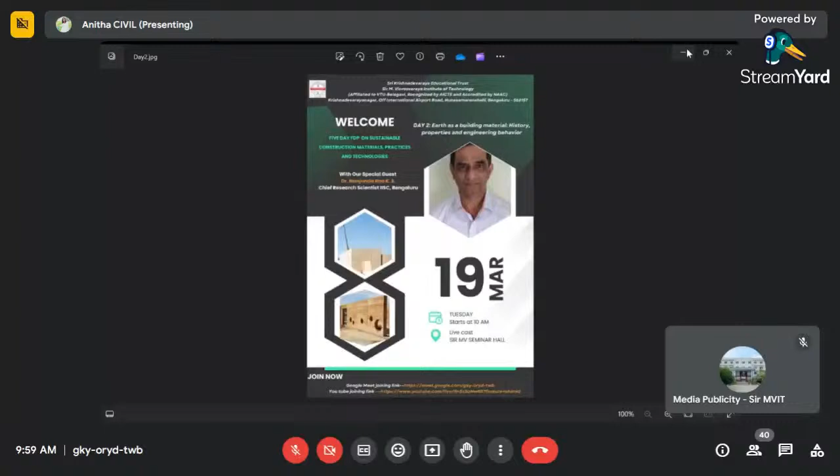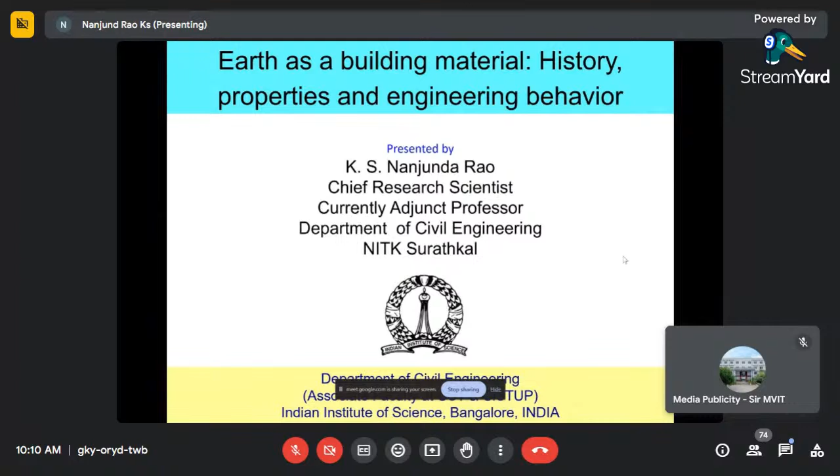That is when the discussion happened that we need to establish a research institute in India during the British times. At the same time, Tata was also very much interested in starting a steel plant in this country because we were importing all the materials. So these discussions between these two great giants, visionaries, finally gave birth to this Indian Institute of Science.

It took its birth possibly in 1903-4. And at the same time, I would like to recall and thank another great person when they were really scouting for land to establish this institute after the idea was mooted by J.N. Tata. With great difficulties, the British agreed.

They were looking for land, where to set up, in which place. Initially, it was Roorkee, but subsequently, due to great difficulties, they finally chose Bangalore for setting this up.

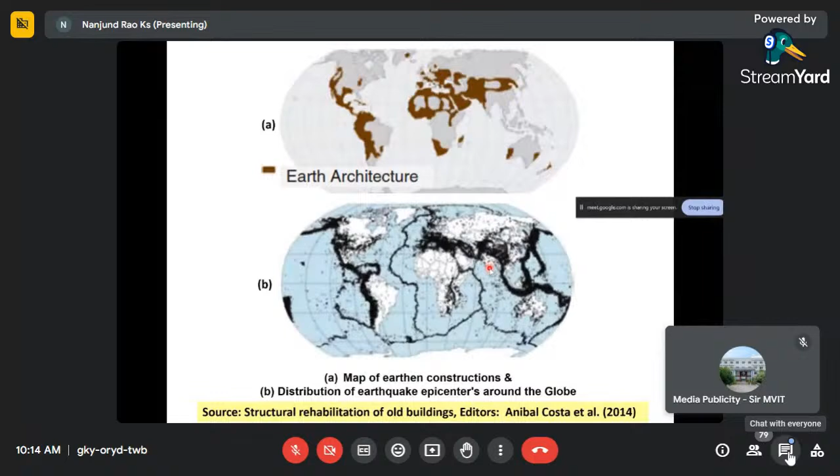Earth as a building material is the first material - you can say it has a huge history. It was one of the materials which was locally available, and therefore it was employed in its raw state. Subsequently, as development took place, as scientific progress took place, it is no longer used only in the raw state, but still people use it in the raw state, that is, earth without any stabilizing.

Now, sustainability is what is the buzzword today. People simply use the word. Now, what is it? From among the challenges of the future, starting with the hot topic of recent economic blow-up, to the global socio-political scene, as well as the cultural needs for the growth of mankind, there is one which can be considered extremely fundamental for all future development, and that is sustainability.

Now, let's look at what is sustainability, a loosely used word very often by everybody. What is sustainability? Can it still be a buzzword? But what does it mean?

Now, Brundtland, in his report in 1987 to the World Commission on Environment and Development, broadly defines it as follows: meeting the needs of the present generation without compromising the ability of future generations to meet their own needs. This is what Brundtland defined sustainability as.

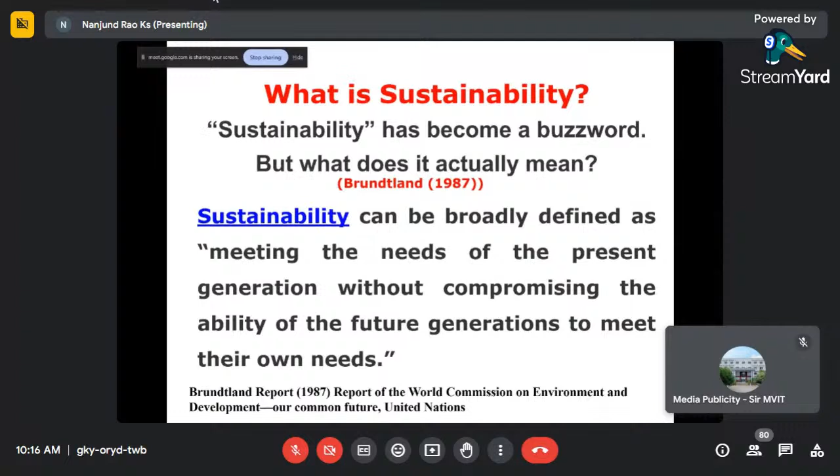Now, I would like to share with you that the concept of sustainability, even though Brundtland defined it in 1987, nearly 40 to 45 years before, in India, people already started thinking about it. Kumarappa, in 1945 itself, in his paper on economy of permanence at Sarva Seva Sangh Prakashan, Varanasi, India, actually started defining what is sustainable development, what is sustainable society.

According to Kumarappa in 1945, a society which manages its economic growth without causing irreparable damage to the environment, and satisfies the needs without jeopardizing the prospects of future generations, is a sustainable society. So the awareness of sustainability was much before even people started thinking at the international level, and that is the importance of Indian thinking, which we today do not want to give too much weightage to, but India was always leading from the front.

Now, sustainability itself has multiple dimensions. You can look at sustainability as a thing supported on three pillars, which are the powerful tool for defining and analyzing issues of sustainability. The three pillars are social, environmental, and economic. Let's look at it in greater detail now.

When it comes to describing sustainability, we need to be concerned about three main areas of influence. They are the three interconnected spheres, called spheres of sustainability, that describe the relationship between them: one representing environment, the other economic, and the third social. All these three things have to be addressed.

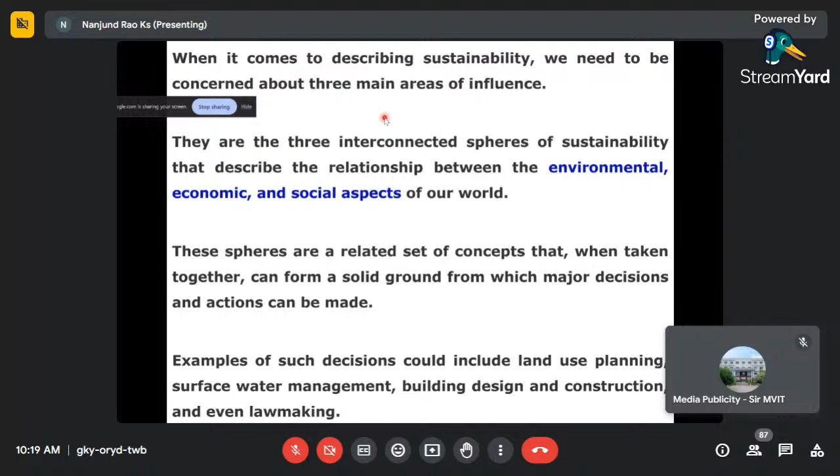Examples of such decisions include land use planning, surface water management, building design and construction, and even lawmaking.

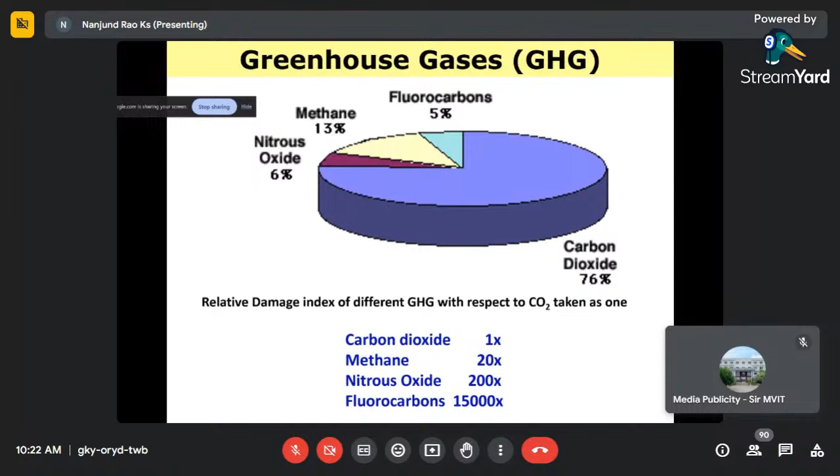Now if you look at the damage index of these four GHGs in comparison to CO2 taken as one, even though CO2 is highest in quantity, methane causes about 20 times more damage compared to carbon dioxide, nitrous oxide is 200 times, and fluorocarbons, used in refrigeration and significantly reduced today after understanding their impact, is about 15,000 times. So that is the kind of impact these four gases have on the planet.

So the topic of today's faculty development program is sustainable construction materials, concentrating on construction materials, practices and technologies. Keeping this in mind, I am going to talk about one of the earthen materials called rammed earth, for construction in civil engineering.

Now, concrete is largely used in civil engineering construction, in large amounts. In the last 110 years we have been using Portland cement concrete. Earlier, the binder was lime, so it could be surki or lime concrete. But Portland cement concrete, we say, is not sustainable. What are the reasons for it to be not sustainable in relation to the greenhouse gases we just discussed? And not only that, there are other reasons too.

The first reason is that the concrete industry consumes a huge amount of virgin materials. Even in the production of Portland cement itself, we use large amounts of virgin natural materials. We also use fine aggregate and coarse aggregate in concrete, and even though they are inert, we use large amounts of natural materials for them. We quarry, for example, fine aggregate from river sand. Now that is banned, so a lot of quarrying is happening to get coarse aggregate. And in the absence of fine aggregate from river sand, we are now crushing rock to make M sand, manufactured sand, which again utilizes virgin natural resources.

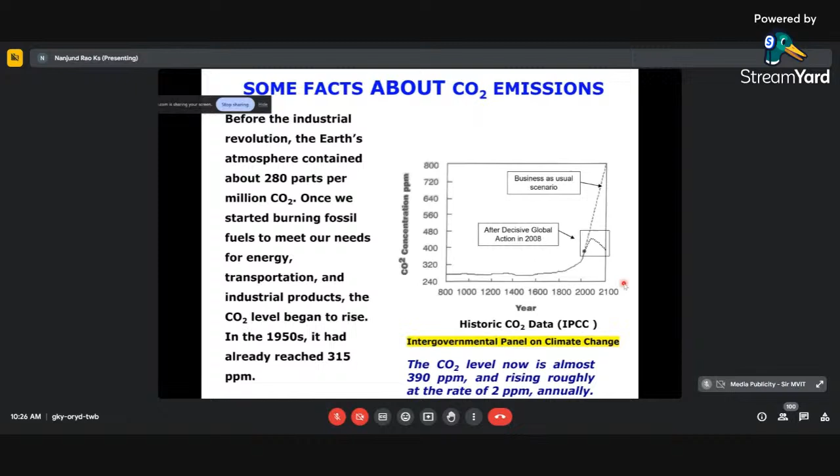Let us continue to see what happens. Now, some more facts about carbon dioxide emissions. There is no magic bullet to stop this global warming quickly.

A number of reports have indicated that approximately 450 ppm of CO2 is the threshold level. That means if you cross this threshold, it would have already caused irreversible damage to the planet. The window of opportunity for mankind is very small, and we have to immediately take action to slow down the rate of further increase in CO2 levels, and eventually bring it or keep it below 450 ppm so that there is no irreversible damage.

This is again taken from some of the studies by McKibben in National Geographic, October 2008. The chart on your right clearly shows that if you take corrective actions, you may be able to bring it down in the near future. But we need to take a lot of actions, not just one.

Now let us go to some more facts about CO2. What is this CO2? In Earth's atmosphere, carbon dioxide is a trace gas that plays an integral part in the greenhouse effect, carbon cycle, photosynthesis, and oceanic carbon cycle. It is one of the several greenhouse gases in the atmosphere of Earth.

The current global average concentration of carbon dioxide in the atmosphere is 421 ppm as of May 2022. This has further gone up - it is 424 ppm as of March 2024. This is an increase of 50% since the start of the Industrial Revolution, up from 280 ppm during the 10,000 years prior to the mid-18th century. The increase is due to human activity.

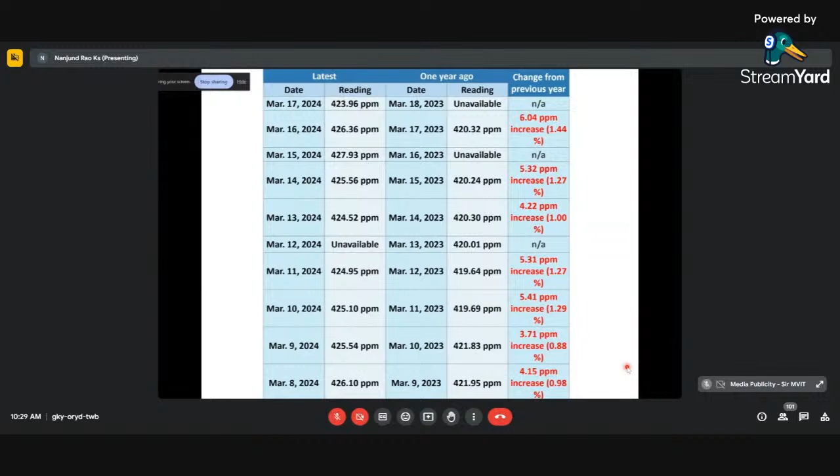These are some things about CO2. Now, as I mentioned, we are roughly about 424 ppm. You can see from March 8th to March 17th, the readings and what is the ppm. On March 16th, 17th, we are already at 424 ppm. So 450 is the threshold level - we are just away from that.

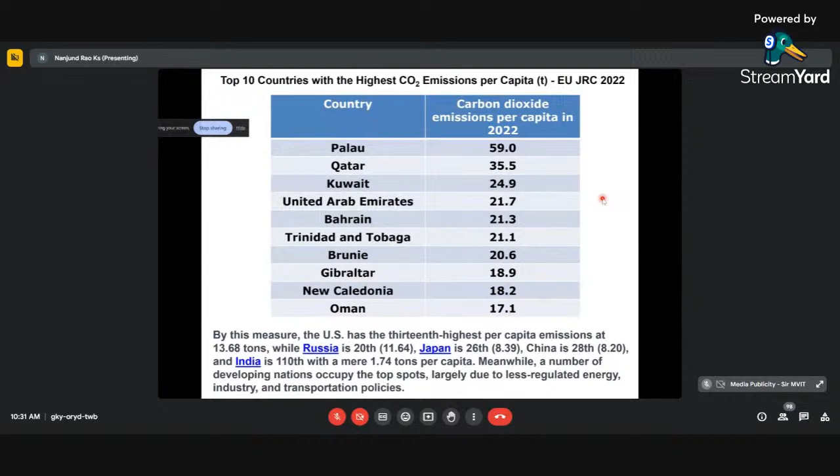Meanwhile, a number of other developing countries occupy higher or top slots, largely because of regulation issues in terms of their energy, transportation policies, etc.

So let's come back to our civil engineering material, that is concrete itself. Portland cement production is highly energy intensive. The industry is consuming energy at an annual rate of 7 billion gigajoules. The cement industry is also implicated in global warming - Portland cement clinker production is releasing nearly 1.5 billion tons of carbon dioxide, which is approximately 7% of global carbon emissions.

Now, modern Portland cement concrete, because it cracks easily, has poor durability. Thus, the material efficiency, which is called resource productivity, of the concrete industry is very low.

Let us look at concrete and Portland cement. Global usage of concrete, as I already mentioned, is second only to water. The demand for concrete is increasing to meet infrastructure developments, especially in developing countries like China and India. Current Portland cement production is insufficient to meet this increasing demand. Do we increase Portland cement production, or can we use alternative binders to meet the increasing demand for concrete? This is the big question in front of all of us.

What are the issues with Portland cement? Portland cement production releases high amounts of CO2 to the atmosphere. Production of 1 ton of cement clinker earlier released almost 1 ton of CO2, but today with changes in production technology, about 750 kgs of CO2 is released into the atmosphere for every ton of cement clinker produced.

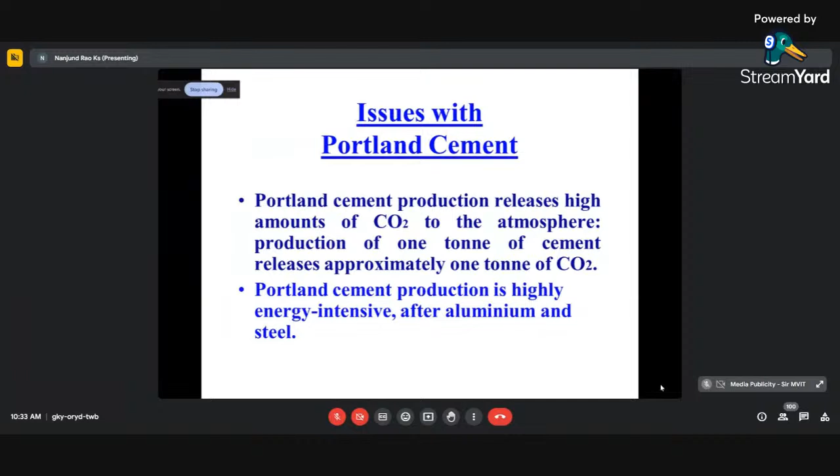Portland cement production is highly energy intensive, after aluminum and steel, which are also construction materials. There are different strategies suggested in the literature to reduce the carbon dioxide.

So what are the things that have been looked at? One of them is carbon capture and storage. We cannot stop carbon dioxide emissions, but we want to limit it in the atmosphere. Cement production cannot stop because we have not yet successfully produced a new binder, so we have to still survive - Portland cement production will continue. Some carbon dioxide eventually, whatever be the efficiency of our production techniques, will still come out. So one way is to have strategies to reduce it by capturing that CO2, not releasing it to the atmosphere, and storing it - this is one of the things that have been tried.

The second thing is, can we reduce the amount of Portland cement in our concrete? How is it possible? By using supplementary cementing materials like fly ash, GGBS, rice husk ash, and so many other things which are available, so that the amount of clinker consumed in concrete can be brought down.

Then the third one is use of nanotechnology - I'll come to it a little later. And the fourth is to look at alternative binders, which are the alkali activated binders.

Now, these approaches which I discussed are not really feasible. What are the reasons? For example, carbon capture and storage - it is a very cost intensive process and it needs a lot of storage. It is economically very, very unattractive for cement industries, and if it is so unattractive, nobody would like to use this process.

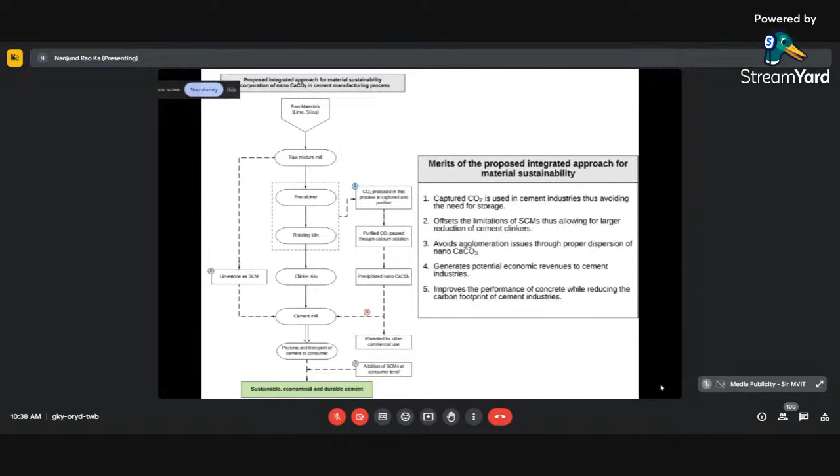What are the merits of this integrated approach? Captured CO2 is used within the cement industry, thus avoiding the need for storage. It offsets the limitations of supplementary cementitious materials, allowing for larger reduction of cement clinkers. It avoids the issues of agglomeration in nanotechnology through the dispersion process. It generates potential economic revenue to the cement industry, so the cement industry will accept this. It improves the performance of concrete, that is durability, while reducing the carbon footprint of cement industries. This is the very latest paper which talks about an integrated approach to address CO2 emissions in a very efficient manner.

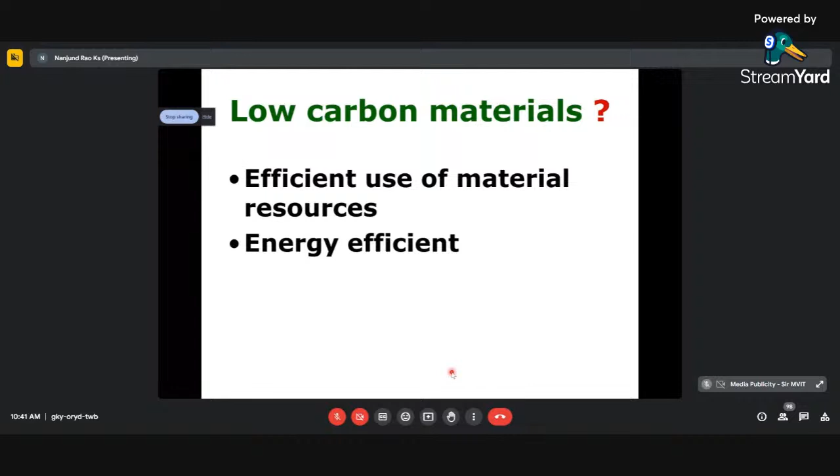We will now come back to narrower things, which is low carbon building materials. What are these low carbon building materials? Why are they low carbon? Efficient use of the available material resource. It is energy efficient, it is recyclable. It reduces GHG emissions and CO2 concentrations in the atmosphere. If it satisfies many of these things, then only it is eligible, qualified to be called a low carbon material.

Today's discussion will concentrate on one aspect where earth is used, called rammed earth construction, both in stabilized and unstabilized form. What is this rammed earth? Rammed earth is a form of unbaked earth construction. When I say unbaked, there is no need of firing, which we do in fired clay bricks. Therefore, it helps avoid deforestation, which is one of the issues I mentioned. So you are not going to burn at all. The processed soil is compacted in layers to form a component of a building structure, which is termed as rammed earth.

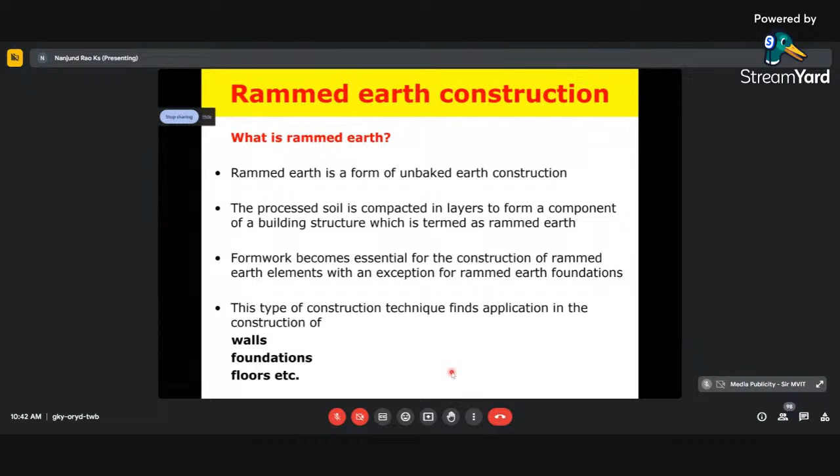Formwork becomes essential in rammed earth construction, with the exception of rammed earth for foundations. For foundations, you dig a trench, put in your processed soil, fill it, and keep ramming—no formwork is required there. For all other building elements, a rigid formwork is mandatory. This technique finds application in the construction of walls, foundations, floors, and so on.

Now let us look at the history of rammed earth itself. Is it something new, innovative, that we discovered today? No—rammed earth has been used for construction of walls for several centuries. You can see rammed earth in the Great Wall of China in the 3rd century. The Phoenician settlements in southern Europe used it in the 7th century. Rammed earth buildings are found in the Himalayan region of India and Tibet around the 8th century. Old buildings in the Middle East and Africa constructed thousands of years ago also represent some of the historical rammed earth constructions. There are a large number of modern stabilized or unstabilized rammed earth buildings built worldwide in the last three decades. I can show you pictures a little later.

Now, what are the advantages of rammed earth? It can provide aesthetically pleasing surface textures—a few slides later you will see how pleasing the aesthetics is, with colors obtained through careful selection and preparation of materials, giving very colorful results and good surface textures. It reduces carbon dioxide emissions, is fire resistant, and offers flexibility in wall thickness. Strength requirements can be tailored by suitable mix design. It allows flexibility in plan forms—walls can be built straight or curved. It is dense and bulky, hence has considerable thermal mass and offers scope for passive environmental performance.

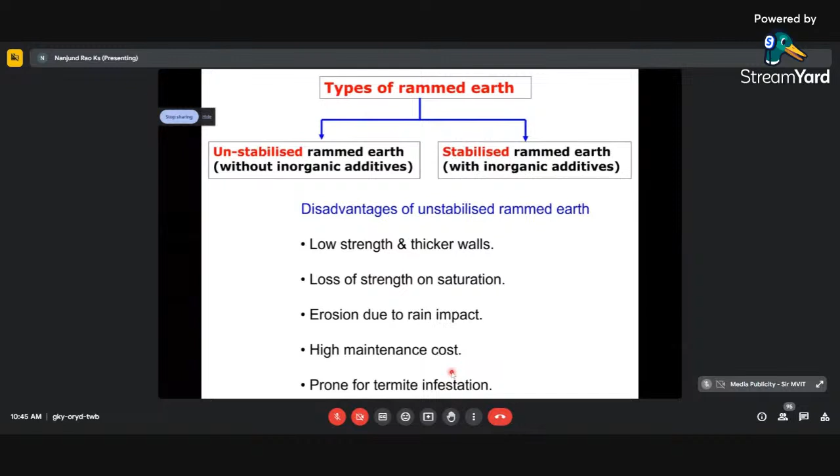Now let us make a critical comparison of unstabilized and stabilized rammed earth. On unstabilized rammed earth: it uses natural materials and therefore has negligible environmental cost at the end of life—meaning when you don't want it anymore, recyclability is there. It has good moisture buffering properties, and thermal performance is very good. It has lower cost with scope for self-help construction, and very low embodied carbon. However, it has lower strength and hence thicker walls, loss of strength and stiffness with moisture absorption, is prone to erosion from rain impact, and is prone to termite and insect infestation and damage, especially in tropics and subtropics.

Now, in comparison, let us look at stabilized rammed earth. It has higher strength than unstabilized rammed earth, even in saturated condition. It's easy to achieve desired strength, with scope for taller buildings, and it's possible to build thinner walls. The use of inorganic stabilizers such as cement or lime is mandatory, which results in higher embodied carbon compared to unstabilized rammed earth. However, it has better durability and good erosion resistance compared to unstabilized rammed earth.

It is also free from termite and insect damage. So each one has its own advantages and disadvantages, and we have to very carefully select based upon the requirement and our needs.

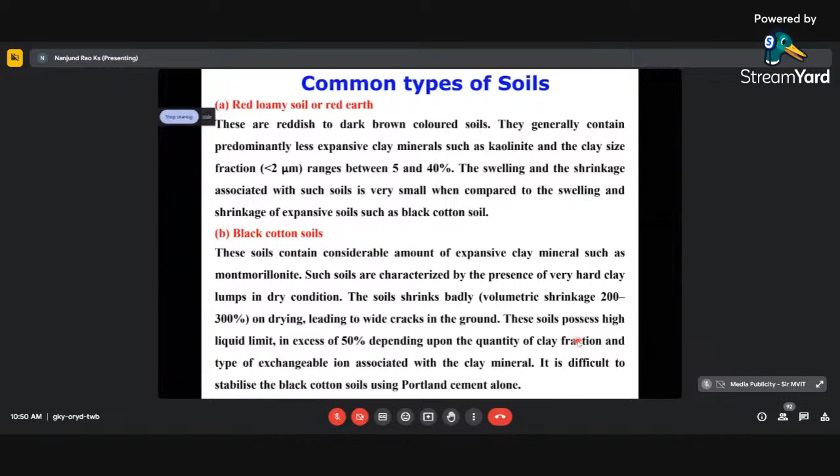The second is, as you go to the north of Karnataka, you will see black cotton soil. It is good for agriculture, particularly cotton, groundnut, and other agricultural products. But these soils contain a considerable amount of expansive clay mineral, montmorillonite. Such soils are characterized by the presence of very hard clay lumps in dry condition. The soil shrinks badly, with volumetric shrinkage of something like 200 to 300% on drying, leading to wide cracks in the ground. These soils possess high liquid limit in excess of 50%, depending upon the quantity of clay fraction and the type of exchangeable ion associated with the clay mineral. It is difficult to stabilize black cotton soils even using Portland cement or lime alone.

The third is the ash modified soils. This is a special kind of soil often found in black cotton soil zones. This soil is called Halu Mannu in Kannada, also called Gadki Mitti in Hindi. Such soil deposits are mined and used for construction of walls and roofs. These soils contain 2 to 3% organic matter in addition to 5 to 6% dissolved salts. They are known to be artificially made soils by mixing organic matter and wood ash and allowing very long durations for natural cyclic wetting and drying.

These soils exhibit very low swelling and shrinkage characteristics and are silty in nature. The Halu Mannu is well suited for stabilized compressed earth block production, using either lime or cement as the stabilizer. The ash modified soils show excellent reactivity with stabilizers like lime and cement compared to natural soils like black cotton soil or red loamy soil.

The last one is the lateritic soil, found in Kerala and coastal parts of Karnataka. The term laterite was first introduced by Buchanan in 1809. The laterite was described as ferruginous, vesicular, unstratified, and porous material with yellow ochres. Laterite can be cut into blocks. In fact, in these regions, the soft material is cut into different shapes and allowed to undergo carbonation exposed to atmosphere. It takes away the carbon dioxide and is made into masonry units. That is why in Latin, laterite - later means brick.

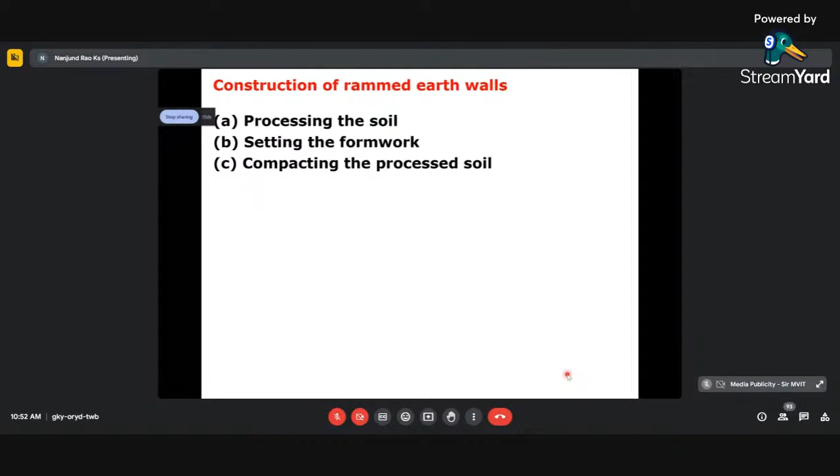Now let us come to the next step of construction of rammed earth. What are the different steps? One is processing of the soil, second is setting up of the formwork, third is compacting the processed soil in the formwork, and curing and later drying. These are the four major steps involved in construction of rammed earth walls.

Now what is processing of soil? The steps involved are breaking the lumps and screening, that is sieving them up to 5 mm size, mixing this soil with sand and gravel in a dry state, and mixing this mixture with cement or lime if it is a stabilized rammed earth, in the dry condition, and later adding water to this.

Now, the quantity of water to be added depends upon the soil composition. Generally, about 10% water is sufficient to bring it to a consistency suitable for compaction. Too much water makes the soil sticky and poses problems during compaction.

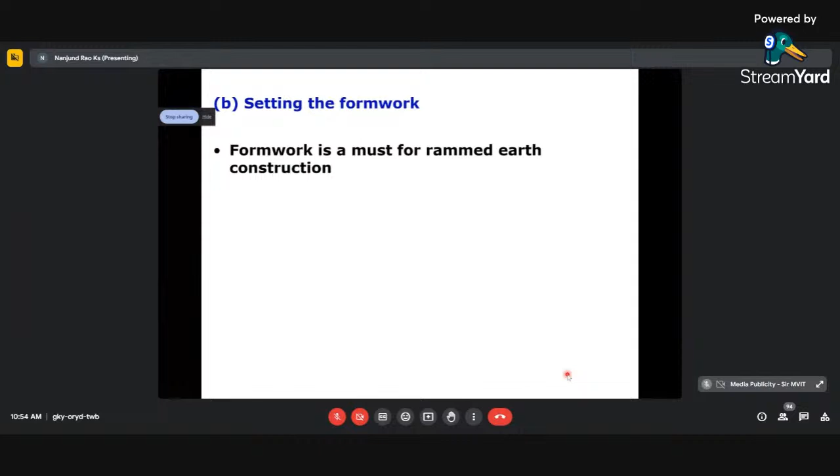Now, the next step is the setting of the formwork. Formwork, as I mentioned, is a must in rammed earth construction. There are a variety of formworks ranging from simple wooden traditional formworks to very sophisticated metal formworks. A rigid formwork is very important.

These slides show a simple small steel metal formwork that has been used by many of us. These are people doing some things at IISc. Now you can see this is a steel mold, a very stiff mold with a lot of stiffeners, and a small portion is done and the mold is moved. The same mold goes on getting shifted and rammed up, and all the vertical joints will later be filled to close these vertical joints.

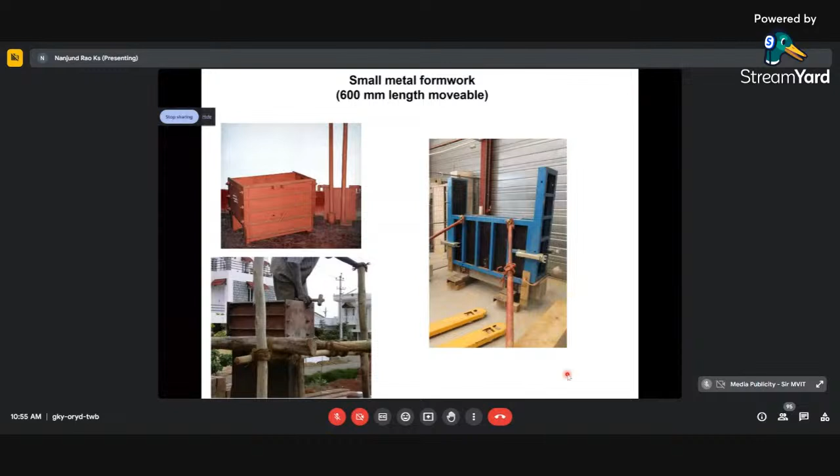Now these are the simple wooden formworks you will see in this slide. This is set up, and then the prepared soil mix, with stabilizer or without stabilizer, is put into this and rammed manually. Now these are much more sophisticated kinds of metal formworks shown in these pictures. The top left and right side are ones used in France for unstabilized rammed earth construction, whereas the picture on the bottom left is the condition within the country, in India.

Now, when you want to build large walls, you also use large dimension formworks. But the problem is that with such long lengths, there could be shrinkage cracks, more so if it is in the unstabilized form. So you can see some long formworks without joints. People don't require joints, but later there will be cracks, and then you have to treat those cracks. Otherwise, insects and ants can create trouble within, whether it is a house or any other building.

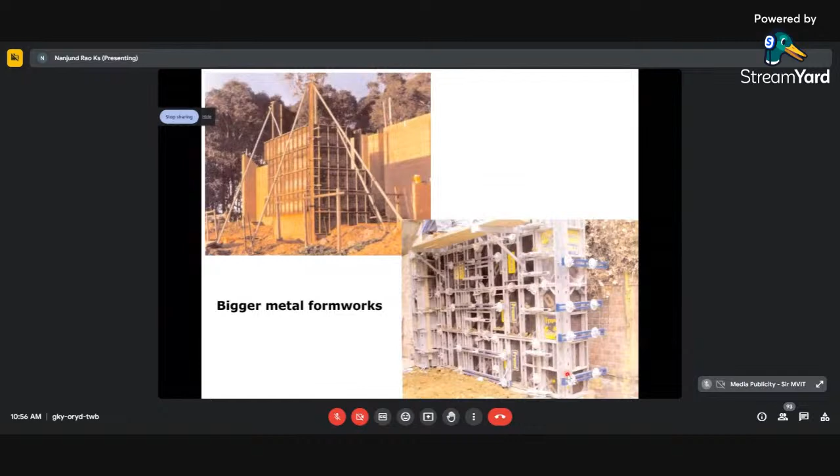So these are all bigger metal formworks. The formwork cost goes up only when you have multiple kinds of construction, a large housing complex of 500 to 600 houses, then you may be able to afford to use such very big metal formworks.

The third thing is compaction of this processed soil, which is poured into the mold. The processed soil is poured into the formwork and then compacted in layers. You can't fill the entire thing and compact it in one go. Normally, layer thicknesses vary between 100 mm to 150 mm, and that is when you ram, you will be able to get the proper density. Thicker layers, if made more than what we have suggested, will lead to stratification and non-uniform density, which hurts the strength as well as durability.

The degree of compaction, measured by density, has to be very nicely controlled. How do you do the density control?

This can be carried out by pouring a definite weighed quantity of the material into a mold and then compacting it. For what volume you compact, you will be able to achieve the required density. So therefore, you continue to ram until the desired volume is reached. Through this process, we will be able to achieve the required or aimed dry density of the rammed earth.

It is preferable to leave the mold in place for 1 to 2 days. You cannot demold it. At least for 2 days we have to leave it there before the mold is demolded and reused again for further construction.

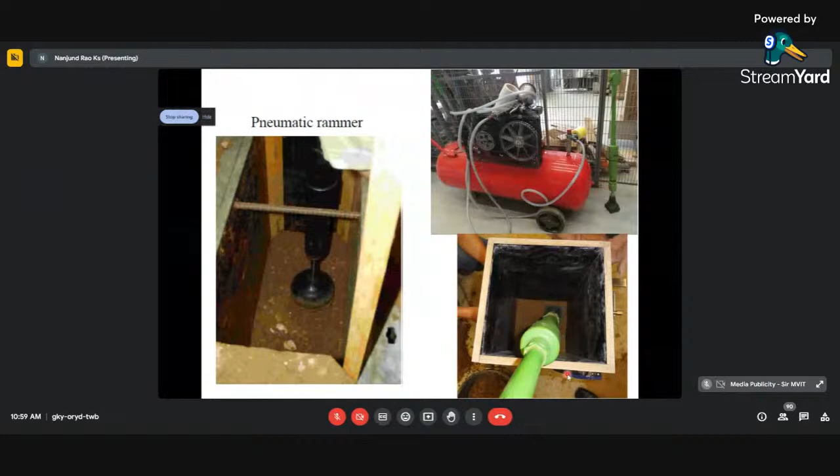Now these are also pneumatic rammers, where labor is a problem. You can use compressed air, and through this you will be able to have ramming done with much more efficiency. This is what people use abroad. Even in this country it's not a very big technology. You should have compressed air, and you can do pneumatically as well when there is a labor issue.

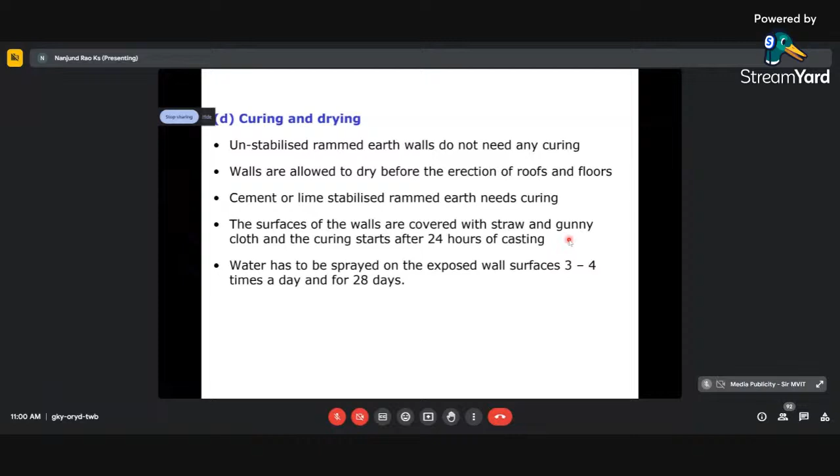Now the last step is to cure. If you're using Portland cement as a stabilizer, or even for unstabilized things, you have to allow it to dry - curing and drying is the common word used. Unstabilized rammed earth walls do not require any curing, but they have to dry. Walls are allowed to dry before erection of roofs and floors. Cement and lime stabilized earth needs curing for the hydration. The surfaces of walls are covered with straw or gunny bags, and curing starts after 24 hours of casting. Water has to be sprayed on the exposed wall surfaces 3 to 4 times a day to keep it wet for a period of 28 days.

Now people have also used a much more advanced technique called pneumatically impacted stabilized earth, called PISE. This utilizes one-side formwork, not on both sides, just one side. At high pressure, the mix we have produced, with more water, is sprayed onto this mold layer by layer in the elevation, and you will be able to achieve and then finish it. I'll show the process in later slides.

Now, the rammed earth method like PISE employs a mixture of earth and cement, but the mixture is compacted in two-sided forms using local materials with a minimal carbon footprint, combined with steel reinforcement sometimes. We create beautiful structural walls. These walls provide thermal mass, stabilize interior temperatures, providing heat in winter and keeping the home cool in summer. The finished texture is smoother than PISE, and rammed earth walls have more of the look and grain of ancient sedimentary stone. Once the walls are completed, the wooden formwork is used for roof sheathing to conserve materials.

Now let's come back to some examples of rammed earth construction, both in India as well as abroad.

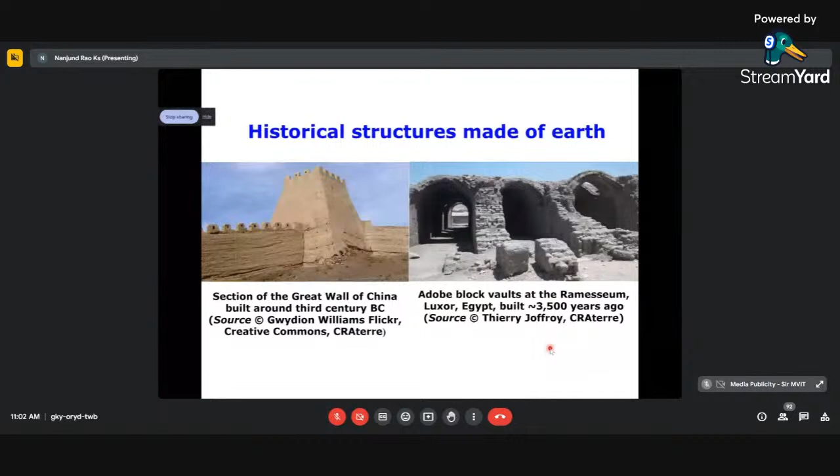There are historical structures made out of earth. As I mentioned earlier, the Great Wall of China was built around the third century BC. This picture shows rammed earth. You will also see the adobe brick walls at Ramesseum in Egypt, which is approximately 3,500 years old. These are all earth-based historical constructions.

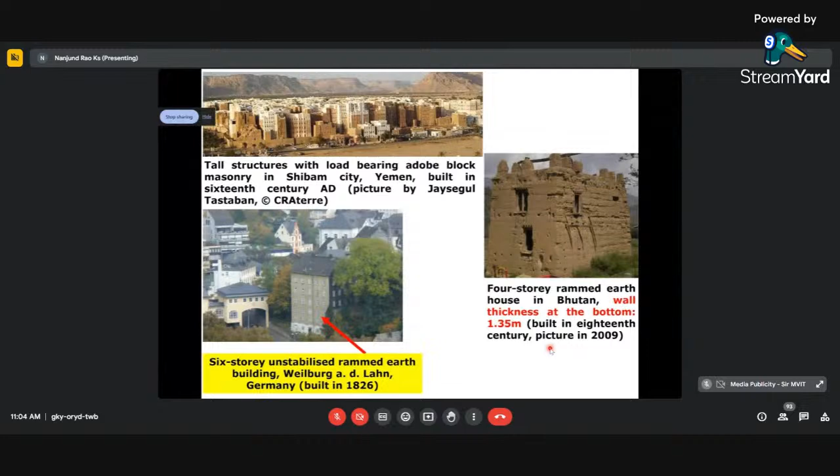This slide gives you three pictures: tall structures with load-bearing adobe blocks at the top, located in Yemen. The picture on the bottom left is a 6-story unstabilized rammed earth building in Germany, in a place called Weilburg. Because it's unstabilized, the wall thickness at the ground floor was 750 mm. The picture on the right is a 4-story rammed earth house in Bhutan, with wall thickness at the bottom of 1.35 meters, built in the 18th century, photographed in 2009.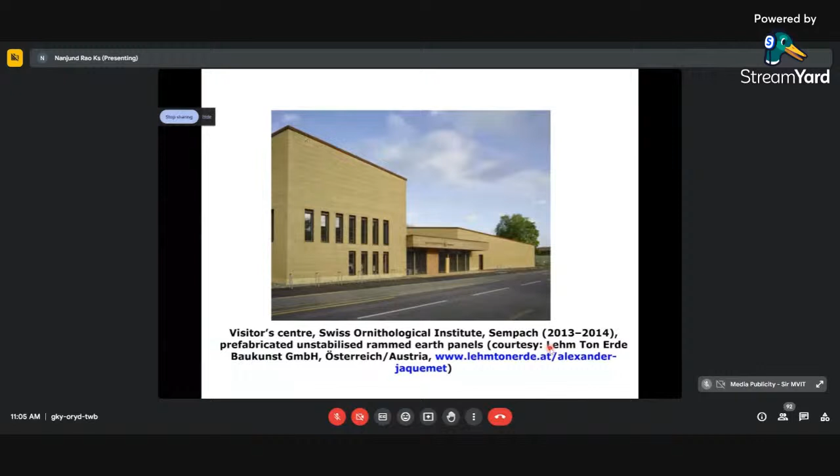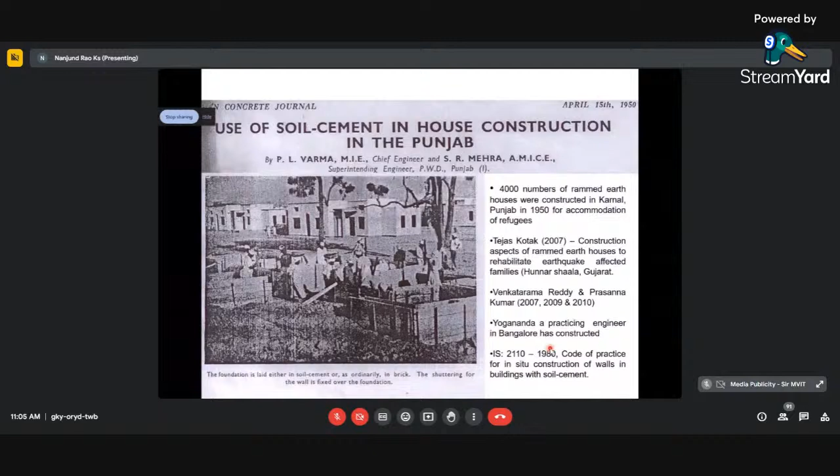In 1841 in Weilburg, Germany, we had a G+2-story building with rammed earth, and you can also see the same building from the gable wall side. I had shown you earlier also in Germany a 6-story load-bearing unstabilized rammed earth building, with wall thickness from ground to top starting at 750 mm and stepping down to 300 mm as you go up. The 750 mm is required because it's unstabilized rammed earth for wall construction.

This slide shows, top left, a school building in Bangalore which we ourselves did at the Indian Institute of Science. On the top right is the lecture hall complex of the Department of Civil Engineering and Structural Engineering Group, which we adopted rammed earth for. The bottom picture shows the different colors you can get on the surface, beautiful looking finishes, and this is one example in Germany.

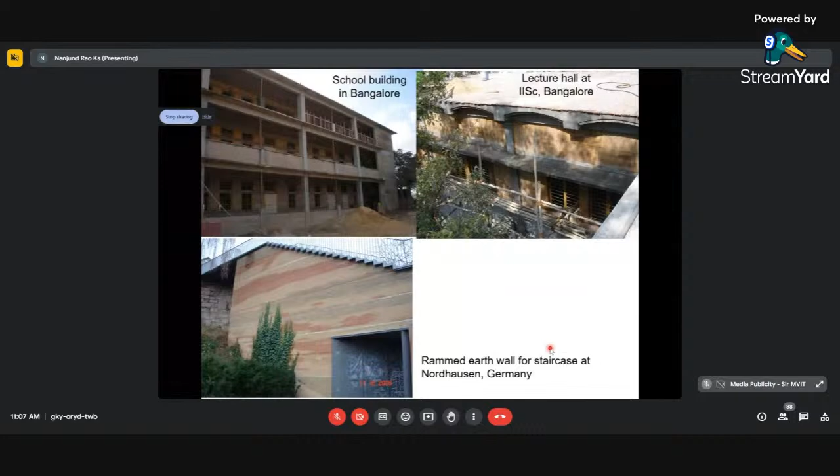You also have buildings of rammed earth in the UK, shown here. You can see this pisé kind of method where you are spraying and then finishing it, resulting in beautiful rammed earth construction, but there is a lot of wastage of material.

This is the picture which I had already shown you. Now coming to the literature, we have a book, Rammed Earth: Design and Construction Guidelines, authored by Peter Walker from Bath University and four co-authors, published in 2005. There are numerous papers addressing the engineering properties and other issues of rammed earth available in journals.

This is a rammed earth Basgo Fort in Ladakh, India. You can see this was also a rammed earth construction using earth.

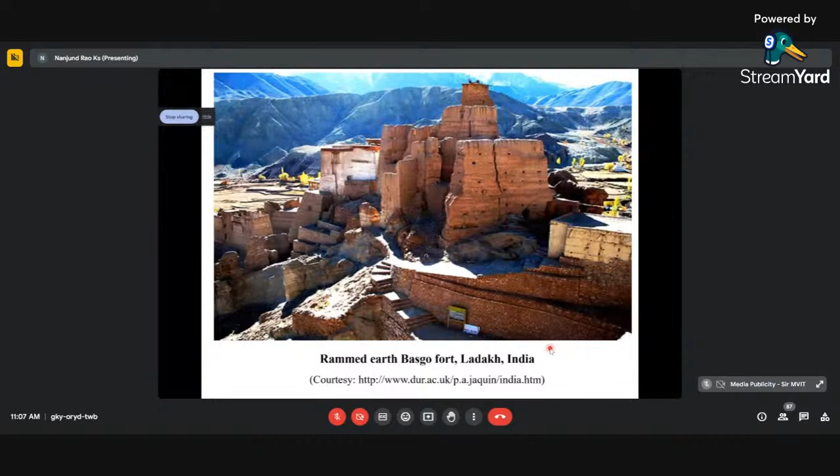When I went, we had an international project with France, and in that exchange program we had faculty from India who used to go there. On one of my visits, this is what I took a picture of: unstabilized rammed earth construction in France, in a place in Lyon.

You can see the close up here. What they also add is bigger sized pebbles. This helps in controlling the shrinkage because of too much fines in rammed earth. So usage of any of these kinds of big sized particles is also a good thing.

This is a close up of what I showed you at the other level. You can see the pebbles very clearly in this picture. This is again another building in Lyon, on the outskirts of Lyon, where rammed earth in unstabilized form has been used.

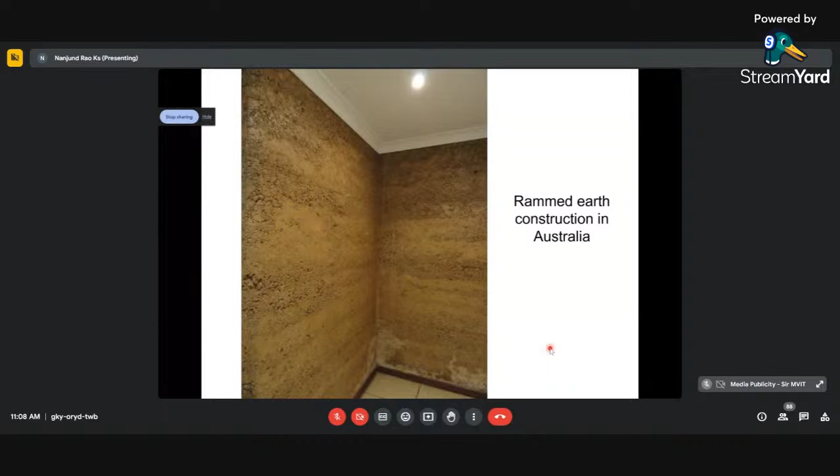This is in Australia. When we went, there was a specialized conference on rammed earth construction in Perth, Western Australia. During that visit, we also found the practices of rammed earth construction in Australia. This is a picture which I have myself taken. This is again in Australia, where they built an apartment complex using unstabilized rammed earth.

Now let us come to the other aspect, which is testing. How do we go about engineering evaluation of the engineering properties? The first thing we have to look at is the compressive strength and stress strain characteristics of rammed earth. What kind of specimens and what testing have we followed at the Indian Institute of Science?

As I mentioned, the soil that we use should have clay content of maximum 15% or 20%, and for that we try to have a particle size distribution. If the soil has more clay, then what we do is add silt or sand to bring down the clay content, and such soils are called reconstituted soils.

In this picture, we are looking at soils S1, S2, S3, S4, and S5, and river sand, which was used to dilute or get the reconstituted soils, along with the particle size distribution of all these materials, the four kinds of reconstituted soils, and also the river sand.

Now these S1 to S5, you can see what they were. All of them had one amount of soil, that is quantity of soil. The first soil, S1, did not have any sand added.

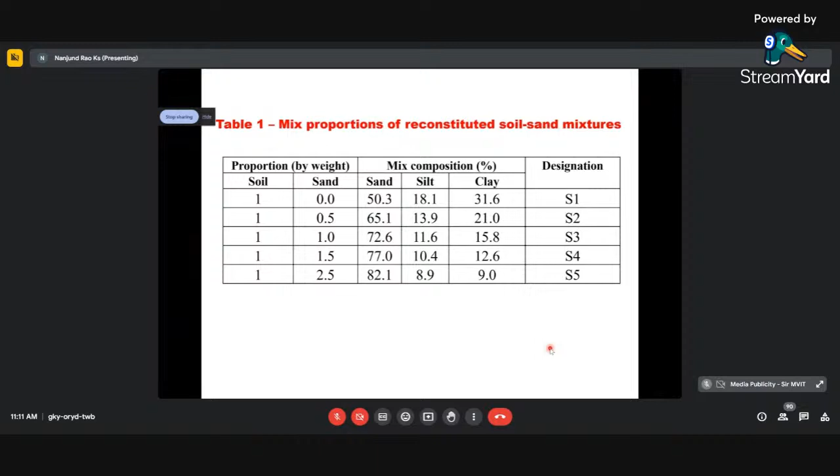Now the first step we do is to cast cylinders. The cylinders are shown in the picture above. You will see the cylindrical mold, which we fill with the mix and manually compact, that is consolidate the whole thing. These cylinders are 38 mm diameter and 76 mm height, produced after curing.

We subject them to compressive tests to get the unconfined compressive strength. We also use CSRE prisms, which are 150 by 150 mm in cross section and 300 mm in height, so that the height to least lateral dimension is 2 in this case, similar to the cylinders where 76 divided by 38 is also 2. So we maintain height to least lateral dimension at 2 to arrive at the compressive strength.

Now that is also not good enough. A big wall versus a small specimen, size effects will be there. Therefore, we go in for what are called wallettes as specimens for estimating the compressive strength of rammed earth, whether it is stabilized or unstabilized.

So these are called wallettes. They are bigger in size. Now here you will see the testing of a prism, 150 by 150 by 300 mm height. We are measuring by applying the load in the uniaxial direction, and that equipment is what we use to measure the longitudinal strains, or the strains in the direction at which the load is applied.

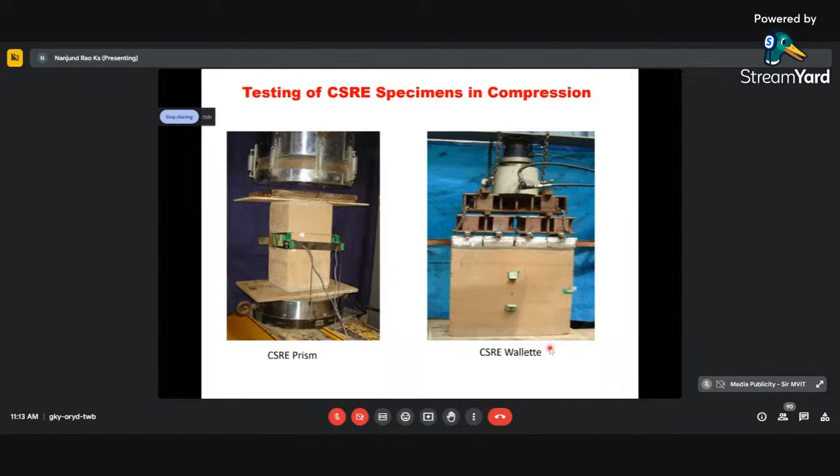Now, coming to the optimum moisture content, we are stabilizing it, and we looked at four soils, S1, S2, S3, S5. 0-minute lag means the moment we add water, we immediately try to get the specimens and the optimum moisture content at different time.

So what this figure is showing you is, by the addition of cement, anywhere from 5 to 12%, the optimum moisture content is not getting altered. That's the thing.

Whereas it all depends upon the soil type. For example, the soil designated S1 requires a higher amount of water for the same cement content, to reach OMC.

This is again the maximum dry density, the relationship between maximum dry density and cement content, for the four kinds of soils that we have discussed. You will see as the cement content changes, what happens to the maximum density for the different soils.

This is again optimum moisture content and how it varies with the clay content in the soil, from a small quantity to as high as 31%, with different cement percentages as a stabilizer. You also have 0%, meaning unstabilized rammed earth, which is the least, as you can see here.

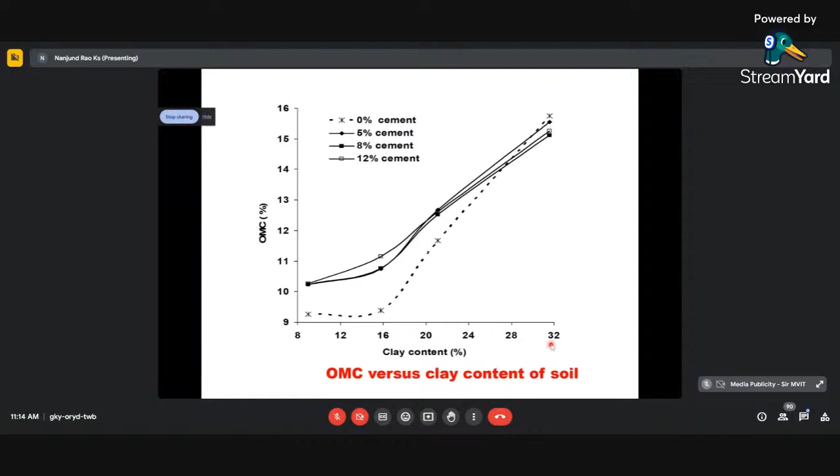Why are we trying to do this? That means you can have a dry mix and not add water. If you add water within a reasonable amount of time, you will have to put it into the mold and ram it. Otherwise, it will lose its strength because of the partial hydration that would have happened. That is the purpose of this particular test that we did. That is, if you don't do it, what happens?

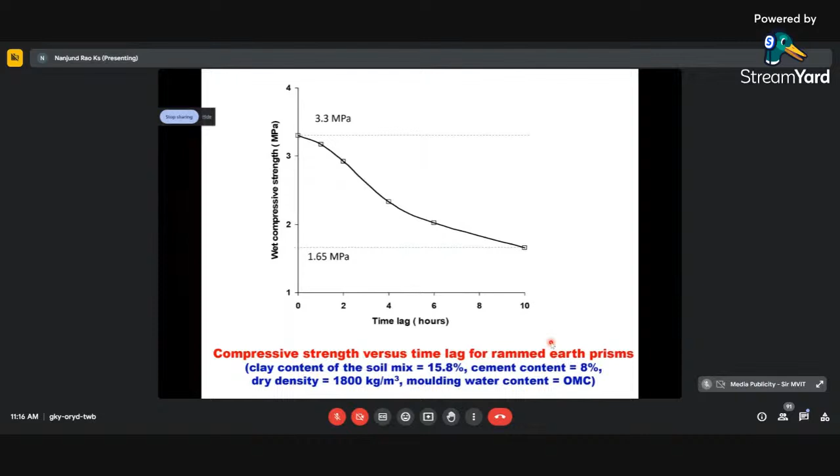You can see this in the next slide. The compressive strength, when you talk wet compressive strength, immediately after mixing the soil, if you ram it, you get 3.3 megapascal. Let us say after 10 hours you mix the materials, add water also, but don't ram it, don't put it in the mold and ram. Then the resulting specimen, if you ram it later after 10 hours, you are going to achieve very small wet compressive strength, dropping from 3.3 megapascal to 1.65, almost a 50% drop. So the importance of ramming the material immediately after adding water is shown in this graph.

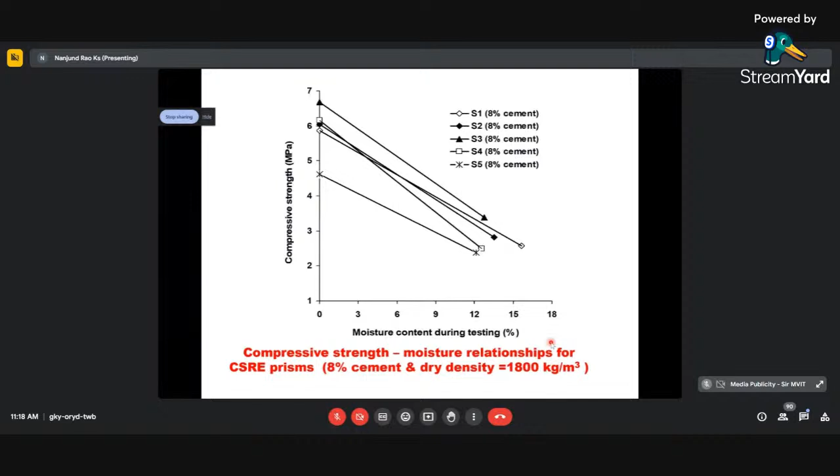Now this is the table which gives you the numbers for S1 to S5 soil, the strength, and at the time of testing what was the moisture content. We also tried to give a relationship between the moisture content and its dry strength. So that is a predicted strength, for both 5% and 8% cement in the rammed earth specimen, which was valid.

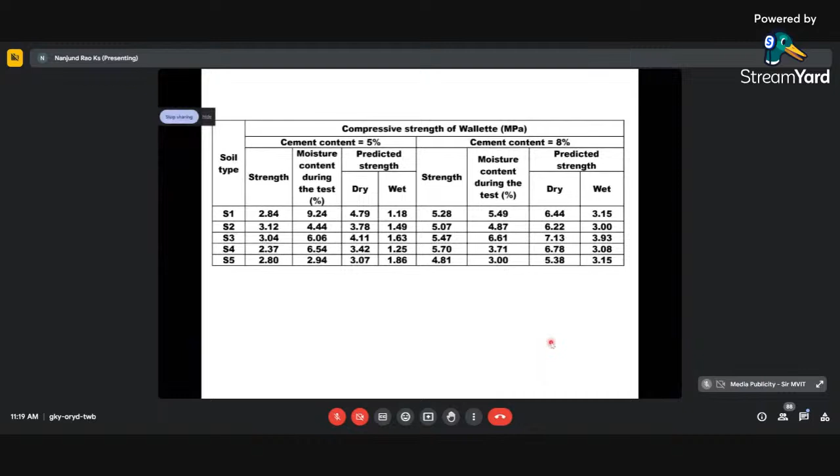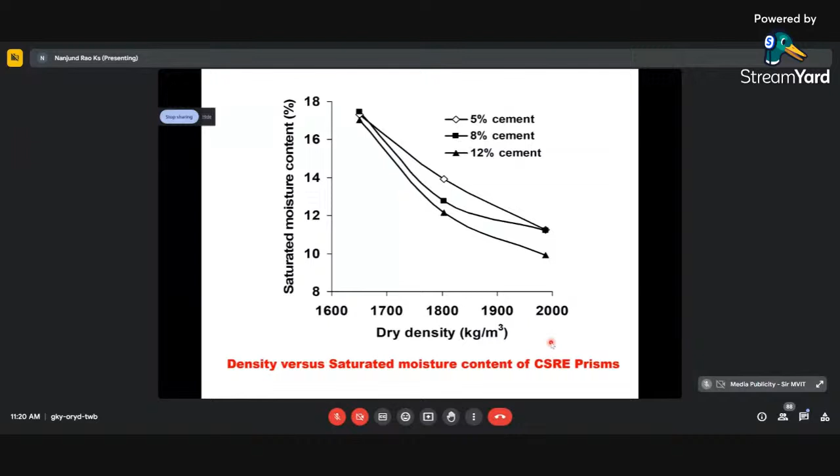This is again saturated moisture content. That is, if you take the specimen and put it in water for 24 or 48 hours, it does not absorb the entire thing - it reaches certain levels and gets saturated. When the density is lower, it will have higher water content for saturation, and when the density is higher, the saturation water will be much lower.

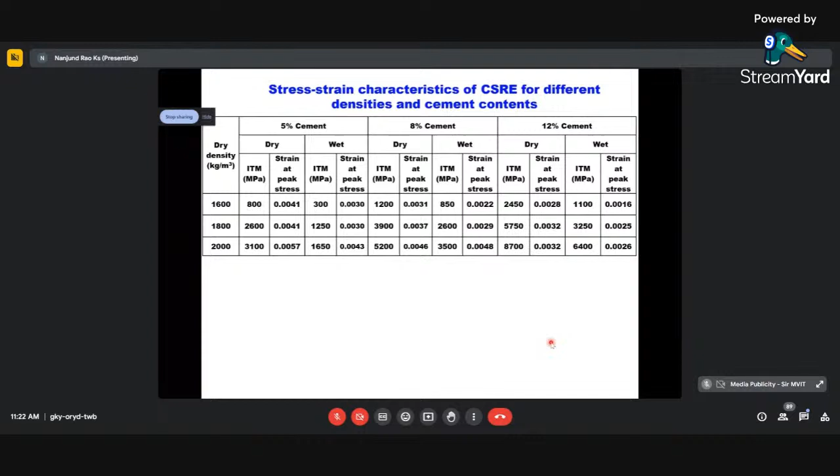This is again stress strain characteristics for different cement contents - that is 5, 8 and 12%, and also for different dry densities, 1600 kg per meter cube, 1800 kg per meter cube, and 2000 kg per meter cube. What is the initial tangent modulus in the dry and wet state, and the value of strain at peak stress for these three cement contents and three densities for dry and saturated conditions. These are the numbers - all these things were generated through tests in the IISc Department of Civil Engineering.

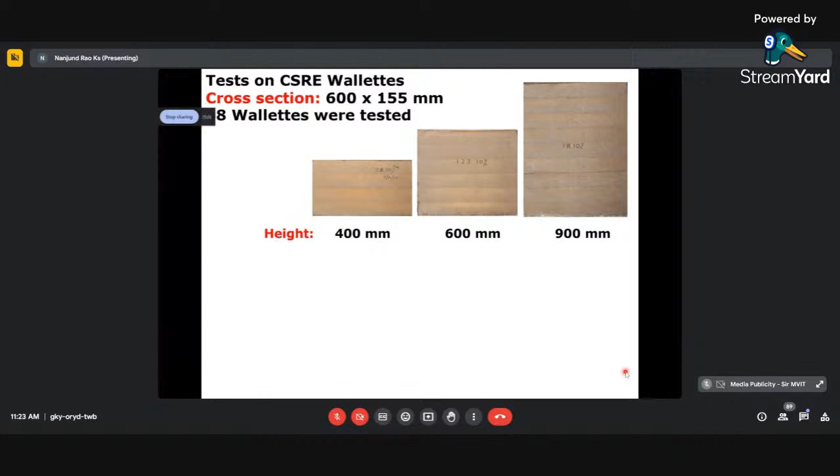So we also tried testing specimens of different heights to understand the influence of the slenderness ratio on the compressive strength of rammed earth walls. The first specimen is 400 mm in height, the second 600 mm, and the third 900 mm. All had 10% cement content and 1800 kg per meter cube density. Somewhere in 2014 we were able to cast the specimens and do the test. The table will show the strengths. All were 155 mm thick, with length 600 mm, while height varied from 400 to 900 mm. The height-to-thickness ratio varied from 2.6 to 5.8, whereas in the case of a cylinder it is 2.

Two cement contents, 7% and 10%, each with two different densities. To satisfy all the parameters, we had to test 12 plus 12 plus 12 specimens. You can see how many specimens were cast and tested, and the statistical values reflected here.

Now what you see in this slide is an international project between India and Australia, an Indo-Australian kind of project. This is the setup we made for full-scale walls. In this test setup I can test a wall of 3-meter height. It has a 200-ton or 2000 kilonewton vertical actuator, servo hydraulic, and a 500 or 50-ton actuator in the horizontal direction. We tested 3-meter tall walls about 1.1 meter in width and different thicknesses. This cross beam, used to apply load, can be moved up and down depending on the height of the specimen being tested. This facility is in the structures laboratory at Indian Institute of Science, Bangalore.

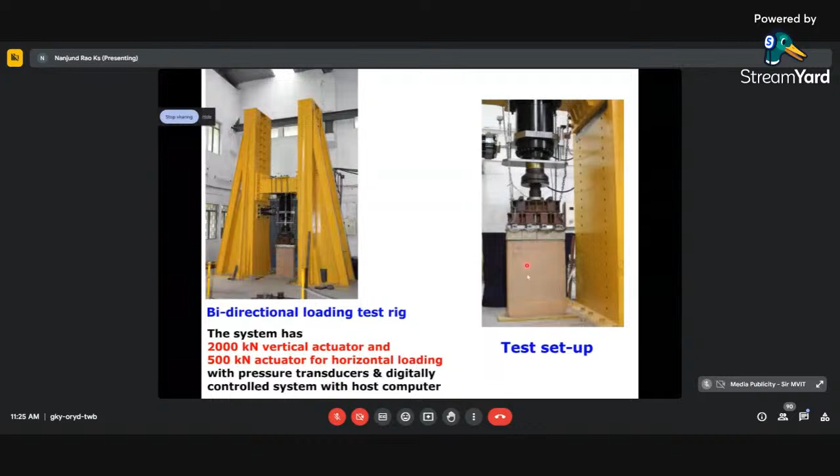Now I don't know if this video works. If it works, it is good. This is a test in progress. Generally when I share, the videos don't work, I really don't know why. Okay, let's not worry, it is not working.

Okay, let us look at the final failure itself. This is how the specimen fails in shear. You can see this is how it cracks at the ultimate point. This is the 200-ton load cell, and this is the 200-ton actuator. A close-up of this failure shows the shear failure, and here you can see through the thickness how it has broken. Similar shear failure happens in the cylinders also.

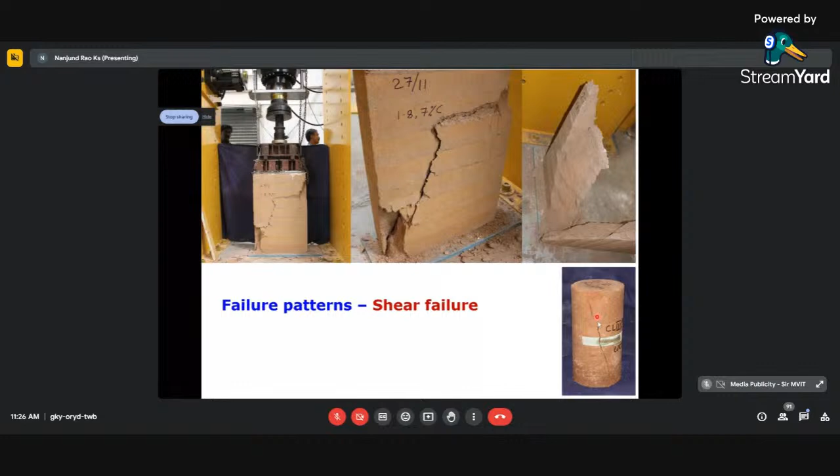Now, these are the specimen test results for 3 different heights. The height-to-thickness, that is aspect ratio, varied from almost 2.6 to 5.8. Moisture content at the time of test is also reported here. After the test, we take lumps of this material from different places, put it in a small steel box, and put it in an oven. We don't take the temperature beyond 50 degrees centigrade, and try to estimate the moisture content at the time of testing. For this moisture content, since we can't change it, we have to normalize it, so we adopted a correction factor for moisture content change, and this is the corrected value.

This is for the different specimens of different heights. What you see here is there is no big difference in the compressive strength, 4.54 to 4.61. That means up to an aspect ratio between 2 to 5.8, the aspect ratio has no influence on the compressive strength.

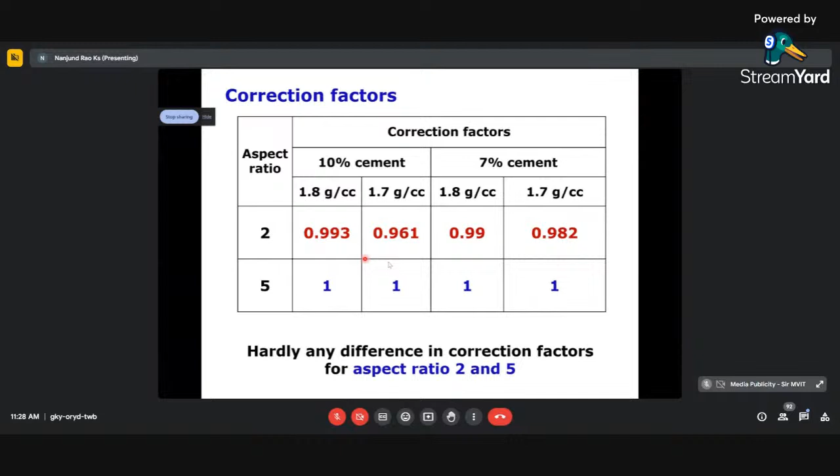No, we didn't leave it like this.

We further went for higher height walls, that is 1500 mm (1.5 meter), 2.1 meter, and 3 meter high walls. In this case, we were able to achieve a slenderness ratio of 10, 15 and 20. We also looked at eccentricity in the load: 0% means concentrically loaded, then 1/12 of thickness, 1/6 of thickness, and 1/3 of thickness of the wall as eccentricities. We looked at how eccentricity impacts the CSRE wall strengths under high H/T ratio.

This has already been completed. At that point of time it was under progress, but now we have completed all the things.

This is the mold for very tall rammed earth walls, 1.5 to 2 meters. We go on adding pieces to increase the height and achieve higher walls. You can see the ramming process going on. The bottom side, the entire thing will be there first. Then we add the first piece so that ramming continues until it reaches that level, then we add the second piece and ram it, and so on.

Here you can see the conical dents I mentioned earlier. After a layer is rammed, we make such indents for interconnectivity between two successive layers of ramming, acting like shear connectors. Later, we also applied cement and cement slurry to enhance the bond.

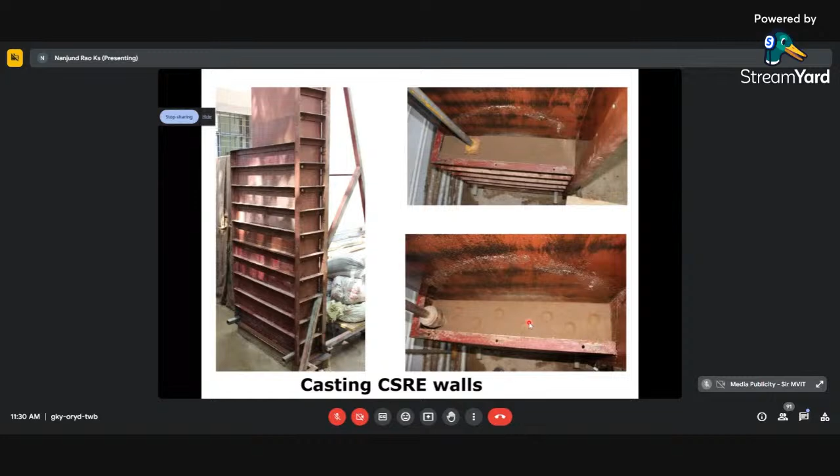This video shows how we cast elsewhere and the arrangement we designed for the whole system to be transported to the test bed of the specimen. It's not easy - these are very heavy and very slender specimens, and with unevenness in the ground in the laboratory, we had to take special care to transport them from the casting yard to the test bed.

You can see this kind of tall specimen with the steel plate, which has to be moved to the test bed. You can see the 3-meter high walls in the casting yard - even there we had to give supports, otherwise it would be risky. Here the supports are removed because we wanted to move this to the test.

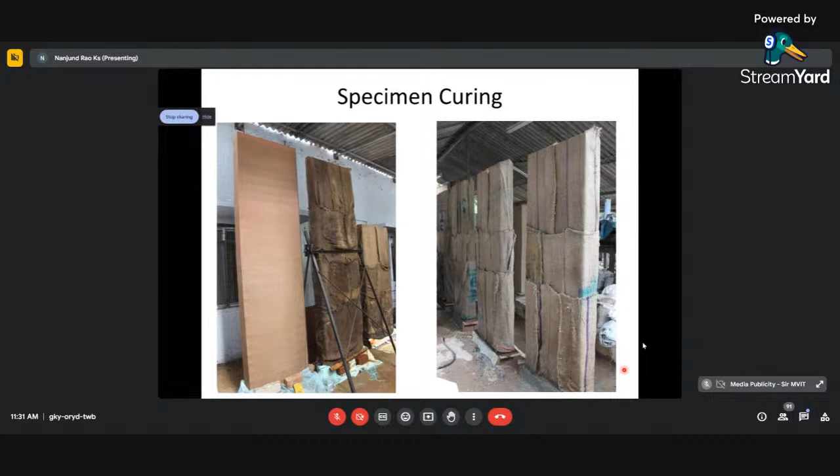This is the curing in progress with wet burlap. Now this is for drying to remove the excess moisture, because when we cure, a lot of water is present.

Before testing, we use electric stoves below, a setup we designed ourselves, along with a thermostat to ensure temperature does not go beyond 50 degrees centigrade. Hot air moves up and escapes out, and in the process it also removes moisture from the specimen, but not 100% - around 1.5 to 2% moisture always remains inside.

Now, for eccentric loading, this is the arrangement we made using a plumb bob, which tells us how much eccentricity we are applying to the load.

This is another video, unfortunately not working, showing how we moved the specimen from the casting yard into the test bed.

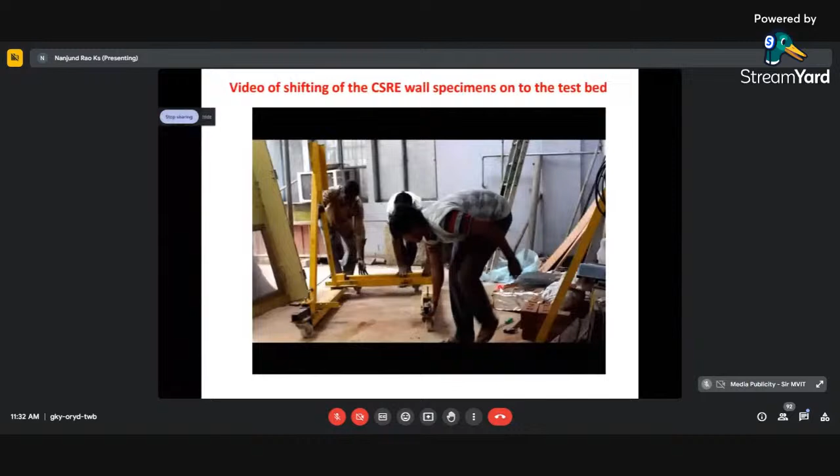Now the specimen is in the test bed and we have tested it. This video is also not working, but you can see the failure patterns. When the H/D ratio is very large, the failure is not by material failure but by slenderness effects, where bending takes place. This can be clearly seen on the opposite faces of the specimen - one side shows the compression phase with crushing, and the other shows the tensile phase, where it simply opened up along the compacted layer. This is what happens when the slenderness ratio increases.

Now, regarding the effect of slenderness ratio and eccentricity, you can see the compressive strength dropping as the eccentricity is increased from 0 to 0.15 or so, for an H/T ratio of 10.

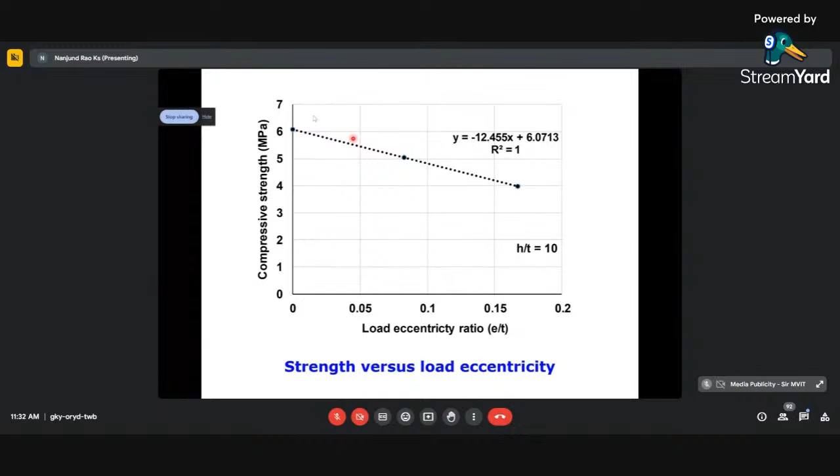So we further went to understand the shear behavior, which is the in-plane shear behavior, that is sliding as well as diagonal compression test.

If you have a rammed earth wall like this, you always have gravity load to withstand, which is compression. But in the event of lateral loads like earthquake or wind, if there is small axial stress, one of the possible ways the rammed earth layers can move is to slide. This is called a sliding shear failure.

When there is significant compressive stress, let's say this is a wall of a 3-story or 4-story building, then the ground story will receive all the loads from the top, and therefore the compressive stress will be high. In such an event, when a lateral load is acting, you will not get sliding, but instead you will get a diagonal tension shear failure.

So in order to understand both these shear bonds, we tried to test specimens, both the triplet shear test as well as a panel under diagonal compression, as suggested by ASTM.

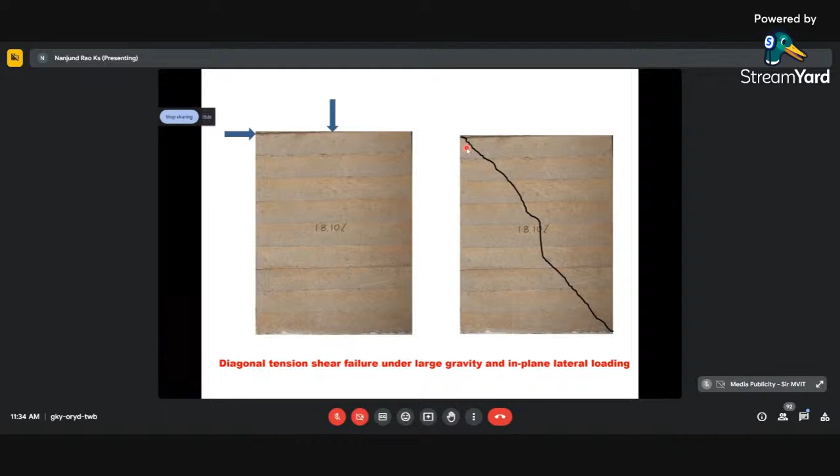What you see is supported, and we also give a normal compression, and we push through a servo hydraulic actuator system, MTS, the middle one. This pre-compression is given in different amounts for different specimens in order to get the Mohr Coulomb factors, that is C and phi, which are related to the shear strength, that is the interface shear. We also measure the slip of the middle one with an LVDT as the load is applied.

Once the interlayer fails, that is, there is a failure here, this middle block will slide and there will be deformation.

Here you will see we tried different bond enhancing mechanisms: one with these conical depressions, second with cement slurry pasted or brushed before the second layer is rammed, and we also had a third method combining both depressions and cement slurry.

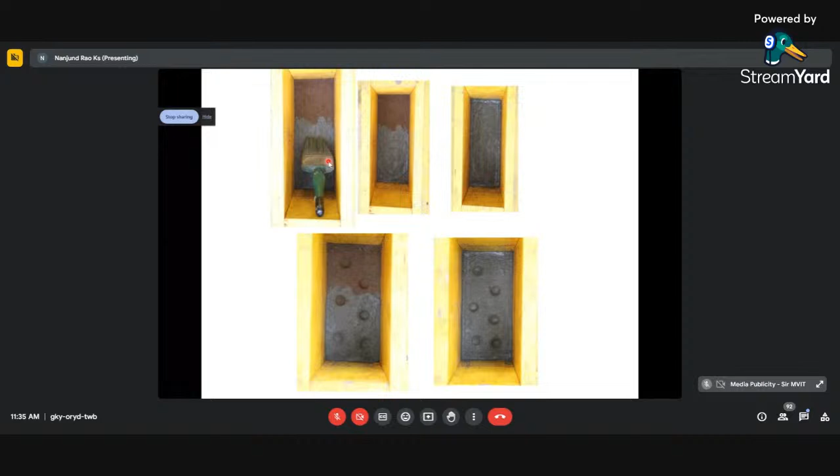What did we do? We tried to get, for different normal stress - that is when the normal stress is 0.3 MPa compression - what happened to the load displacement. What is the load and what was the displacement? That's what we plotted for both dry and wet conditions.

The same specimens were tested in dry, that means about 2% moisture, whereas wet means saturated condition, roughly 18 to 20% moisture will be there.

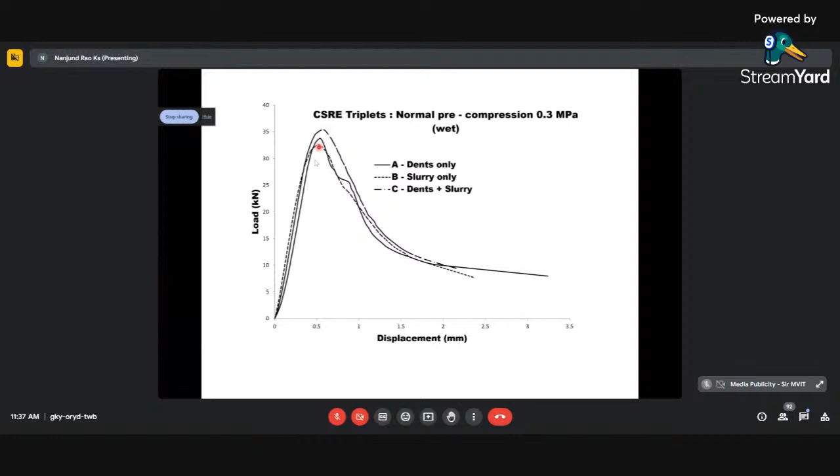In this case, you will see the enhancement in bond strength has no impact in the wet condition, whereas in the dry condition there is a slight difference, and also ductility is much more in one of the cases. This is dents only, whereas slurry and slurry with dents behave in a much more ductile fashion with slightly higher compressive strength also.

In the wet condition, there is no big difference at all. Any enhancement, nothing will happen - almost all of them have the same C and same phi.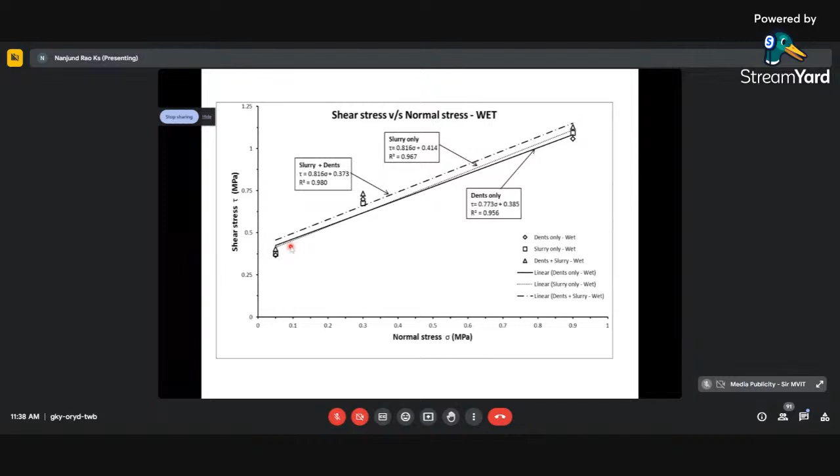Some more pictures showing how they have behaved. Now we went in for the ASTM diagonal tension test specimens. These are bigger panels, and these are the molds for preparing them.

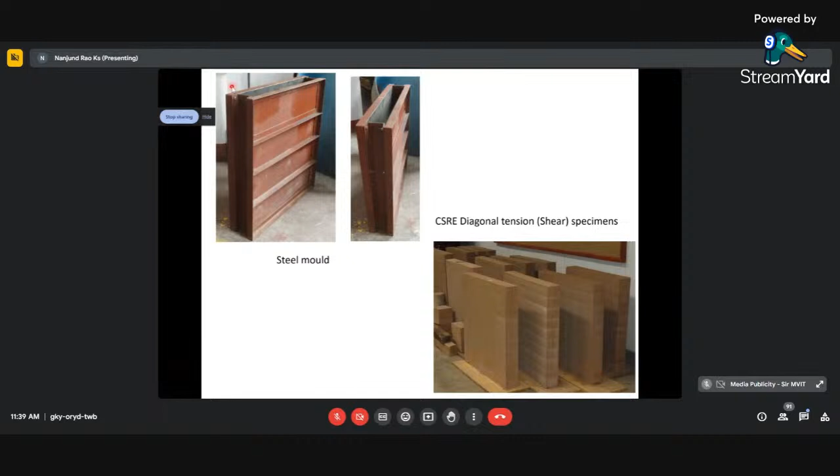Along the diagonal, we put the specimen in an MTS compression machine, which is a servohydraulic testing machine. We have to measure the deformations of the two diagonals, this one and this one, over a gauge length of 600 mm. This is for rammed earth.

Using these two longitudinal measurements along the two diagonals, the deformation and the load let you compute the shear stress and shear strain gamma, which I'll show you a little later. Knowing the load and the cross-sectional area, you can always compute shear stress. From the measured strains on the horizontal and vertical diagonals, you can get gamma, and once you have that relationship, you can estimate the shear modulus.

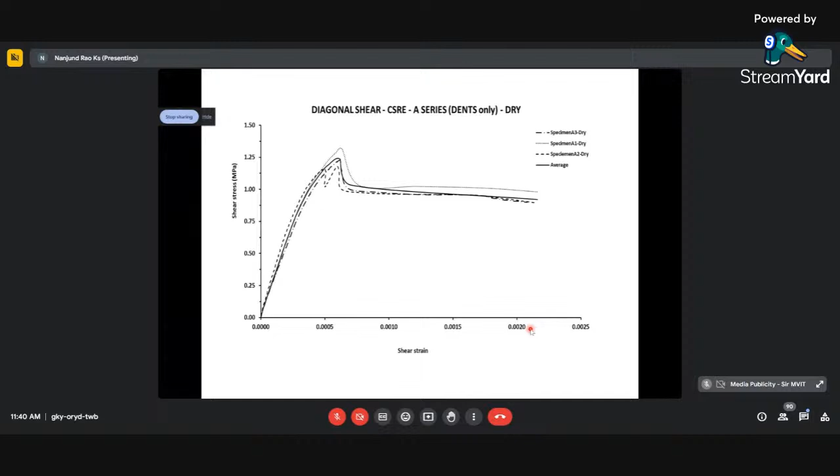The results in the dry state show shear stress versus shear strain. In this case of in-plane loading, there is ductility - it yields, and then without much loss of strength, there's the ability to deform. The shear strain is very high from this point to this point. This is exactly the ductility that you're able to achieve.

So what did we get? The secant shear modulus corresponding to 50% of peak shear strength - meaning we compute the shear modulus not at full strength, but at 50% of peak shear strength for DTS-A and DTS-B, for two kinds of specimens. They found values of 3100 to 3850 megapascals. That is G, the secant shear modulus corresponding to 50% peak shear strength of the specimens.

These two specimens in wet condition: the 3100 value became 2700, while the 3850 value continued to remain 3850 in the wet case as well for this particular specimen.

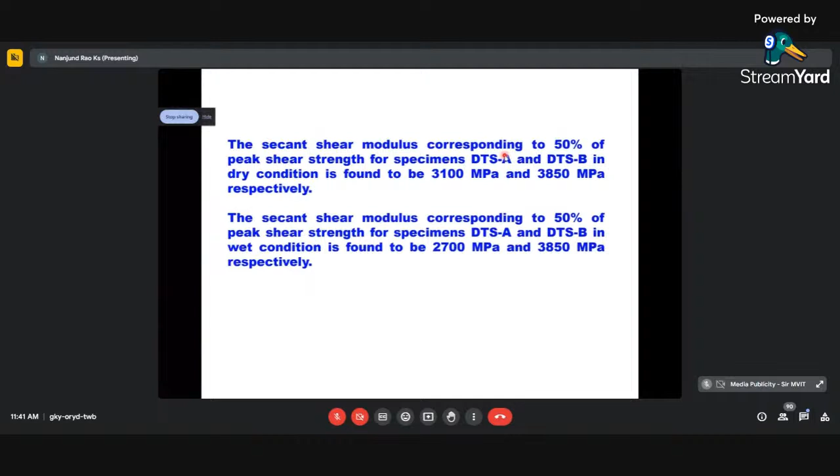Now, this is a video which unfortunately I'm unable to play.

Now we also tried to look at the flexure bond strength, which is out of plane loading. Till now we looked at in-plane lateral loading, but you can also receive out-of-plane lateral loading. For that, we need the flexural strength, or what is called the modulus of rupture, in two directions - flexural stress normal to the bed joints or rammed layers, and perpendicular to the rammed layers.

Now, this is the free vibration damping study. Whenever a building is subjected to earthquakes, in order to understand the behavior you need damping. So we made two kinds of specimens with flexural stress normal to the layers and parallel to the rammed layers, trying to see if there is any difference in the natural frequency, similar to the flexural strength or modulus of rupture.

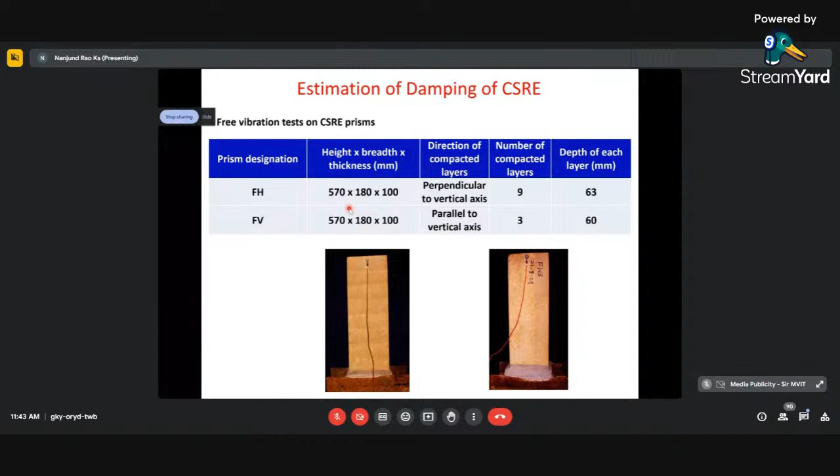In order to do that, we fixed these specimens and used an accelerometer to perform a free vibration test. From that, we were able to use the logarithmic decrement for the specimen, and we also did this for a rammed earth building model.

We compared this result with the literature. There's a paper by Bui et al. 2011, which reported a damping of 2.5 to 4%, essentially for unstabilized rammed earth. This is the logarithmic decrement method that we adopted.

Now, when we talk about building behavior, whether made of stabilized or unstabilized rammed earth, we have to understand its behavior under base shaking, that is, in the event of an earthquake. What are the equipment and apparatus used to imitate earthquakes, and what is the historical development of these base shaking apparatus?

The earliest such apparatus is from 1890. You make a platform, place your specimen on it, connect it to a wheel, and manually rotate it. The specimen moves to and fro in this direction. This was the first attempt to produce equipment to give base shaking to a specimen.

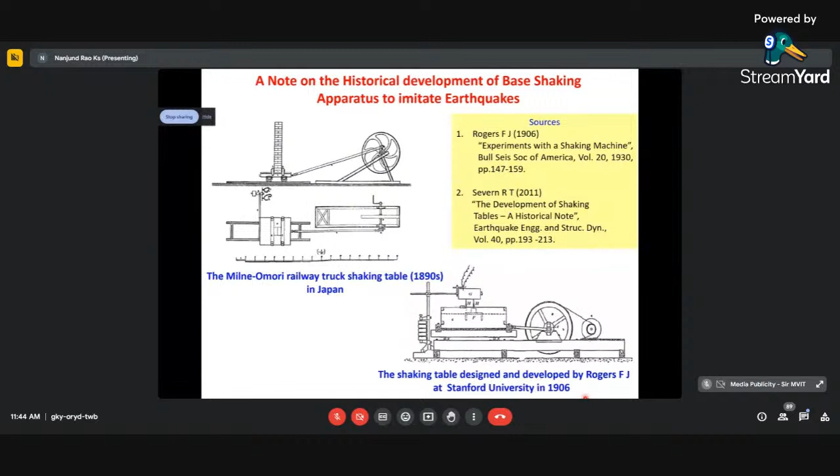This is the specimen. Later, after electricity was generated, instead of manual operation they put an electric motor and tried to do it. This is from 1906 at Stanford University.

But the land required for this was so large. So at IISc, we retained the table concept, but to give the impacts we used a pendulum kind of arrangement instead, which you will see in the next slide.

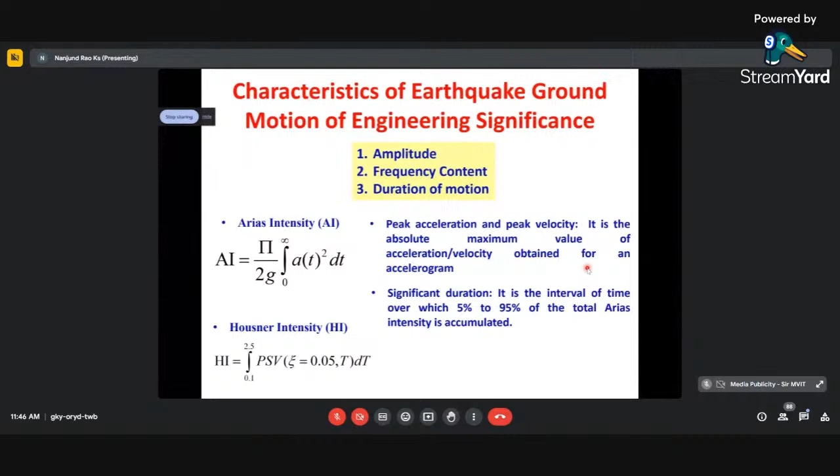We also tried to characterize the base motion using the same parameters used to characterize earthquake ground motion, like amplitude, frequency content, and duration parameters. These include the shock table parameters at IISc, earthquake parameters such as PGA, PGV, SA, Housner intensity energy, and Arias intensity AI, as well as corner frequency for frequency content.

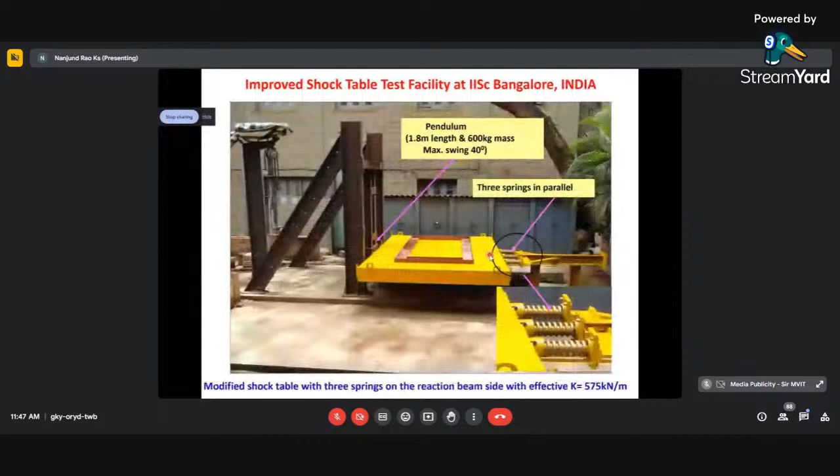We also tried many other things. When the pendulum hits the table, we change the material it hits in order to change the impact. One option is wood or plywood only, another is plywood with rubber in between, or steel plate only, or steel plate with rubber. These materials can be replaced here, giving different forces to obtain different parameters of earthquake ground motion. We also built a building and looked at its behavior on this shock table.

You can see this is the shear wall which receives in-plane lateral load, whereas this wall and this wall will receive out-of-plane lateral load when this table moves like this. And these are the accelerometer positions on cross wall 1 and shear wall 1. That is, this is cross wall 1, this shear wall 1.

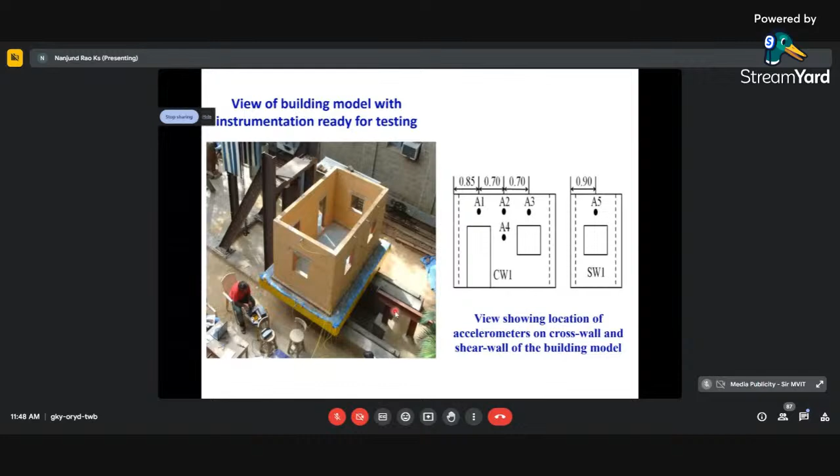The building itself, we later did numerical analysis. What did this have? What I am showing you here is there was no lintel band at all. It's a non-engineered building, only cut lintel on doors and window openings, no roof band, no earthquake resistant feature at all. So this was an unengineered building which we thought we would understand first, and later did numerical tests.

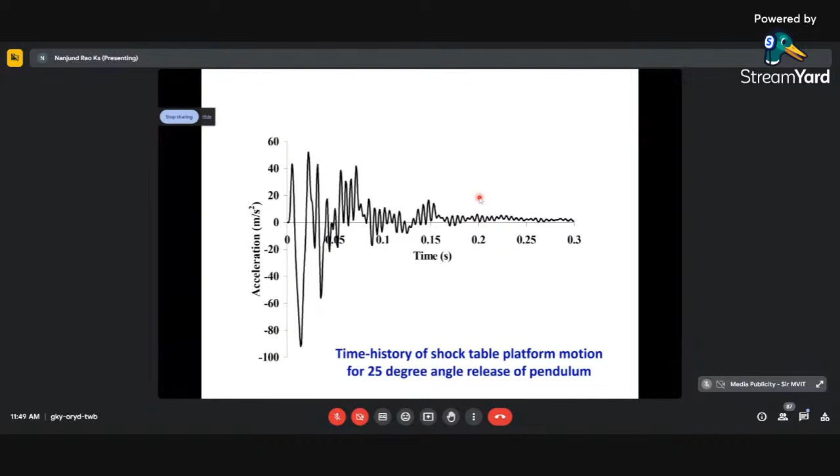This is the kind of table motion that we were able to get. On the table also we mounted an accelerometer, and when it is impacted, what was the acceleration of the moving table, base excitation. And we compared that with the response spectrum for zone 5 as per IS 1893.

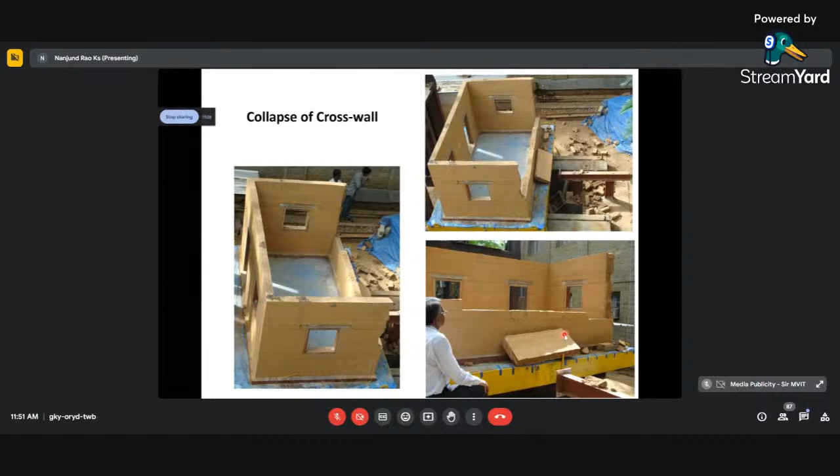This is the failure. This cross wall fell down. Can you see this? Because of this flexural crack, very low flexural strength, and it collapses. This is a chunk of masonry, or the rammed earth, which fell down as a rigid body by overturning. These are some numerical experiments on using finite element with base motion.

I will not get into it. Also, unfortunately, the test I wanted to show you in the video, I am unable to show you.

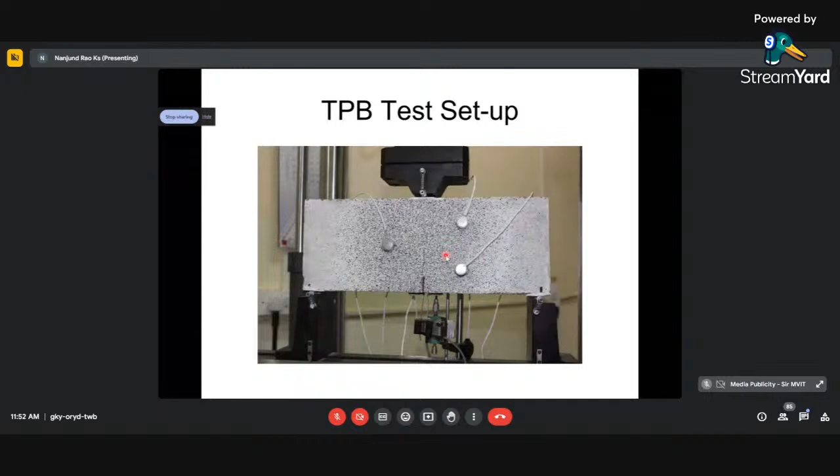So this is how we do the test. You can see the failure has extended, the crack has extended, and this is the DIC pattern that we recognized, that we use. So the load versus load point displacement response for the fracture specimens, and this is load versus CMOD, crack mouth opening displacement. Based on all these results, we will be able to get the properties. I'll just show you here the fracture toughness, then the process zone, and other things.

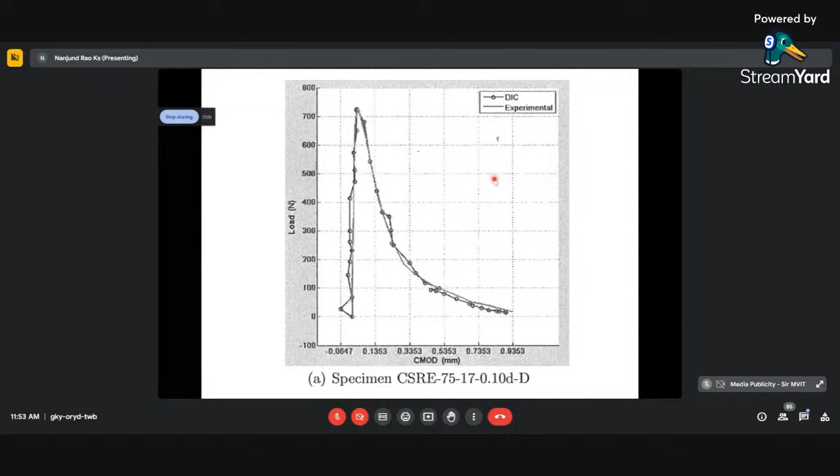So we were able to even estimate the fracture properties of cement stabilized rammed earth. This is the DIC and the experimental load CMOD curve. The DIC, digital image correlation, worked very well - we were able to get matching results from the two different ways of obtaining the load versus CMOD of the specimens.

Now this is supposed to be a video, but unfortunately it is not playing. It would have shown my DIC as well as the acoustic emission sensor data, how it captures the damage being propagated. I cannot show you, unfortunately, the video does not work.

Thank you very much for your patient hearing. I always like to put up the picture of Sir M. Visvesvaraya, the name of your institute. He is my hero. Nature never excuses lapses. Thank you very much.